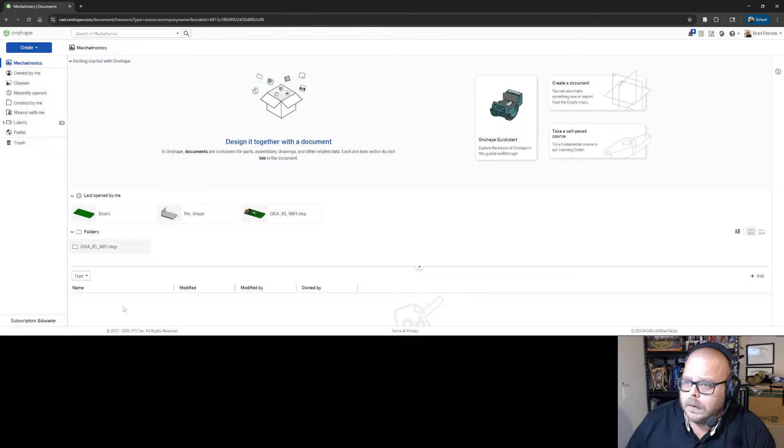So the place I would start — well, first I need to create a document for this thing, and we're going to call it Stinger 1.5. And 1.5 is on purpose, because obviously this guy is the Stinger. And Stinger 1.5, because electrically, this PCB on the new design is designed to be electrically identical to all of the wiring and the hookups that the original team designed into the first Stinger.

So that's why 1.5. Now I do have in my head, for the future, students may or may not know this yet, if any of them happen to tune in — I see one tuned into the stream — but they may or may not know that version 2 is forthcoming as a project for them to work on. So more details about that in the future. But version 1.5 for now, again, the goal is a couple of things.

The goal is to basically make it more tanky so that it could survive visitors to those outreach events. Also more flashy. One thing I have found is when I bring both the Ozobots and the Stinger, the students that visit tend to be more interested in the Ozobots, and I think part of that is because the Ozobots literally have flashing LEDs on them. That's about all I can figure, because frankly the ones we built are so much cooler than those are. So the idea is going to be to take something like this and add some pizzazz, some flair. Again, it's electrically the same.

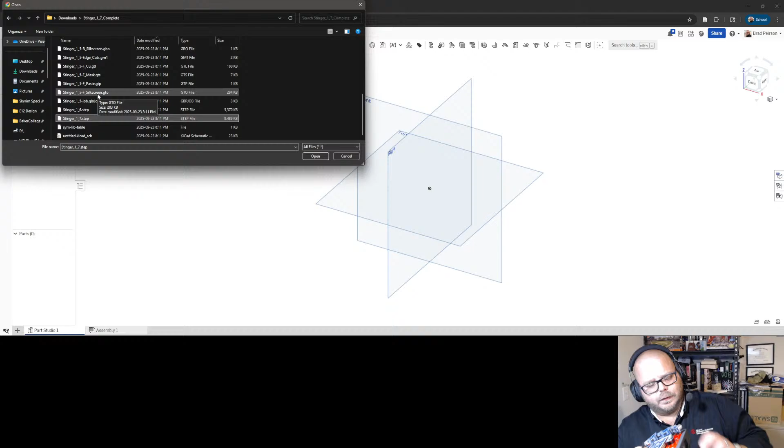This one that I actually have in my hand, I did - this was version 1.6, which is actually the second version of the PCB. It's now on version 1.7 because each time I make electrical mistakes, and I'm willing to admit that. This is the motor driver board on the side. I completely forgot that I was looking at the schematic of the board upside down, so the pins on the custom PCB were backwards, which wasn't good for anybody. The second one fixed that. The current one - which I don't have a current one - electrically is fine.

I was actually testing it in the lab this afternoon. It's electrically sound this time, but then I forgot to check the box for a red PCB. Because part of these projects, especially when they're destined to bring visibility, part of the goal in a design is some bling. And since Baker's colors are red, red PCBs are a good thing, and I forgot. So version 1.7 will have to be redone, and I'll just have to check the box this time for red.

So one thing, I'll be honest, when it comes to the import, we get these options, and by default it popped up without this 'create a composite part' checked. I'm not entirely sure when this is necessary and when it is not. Occasionally, on some of the models I was playing around with between the older first look video and today, when you check this, sometimes it comes in where all the parts come in as a part.

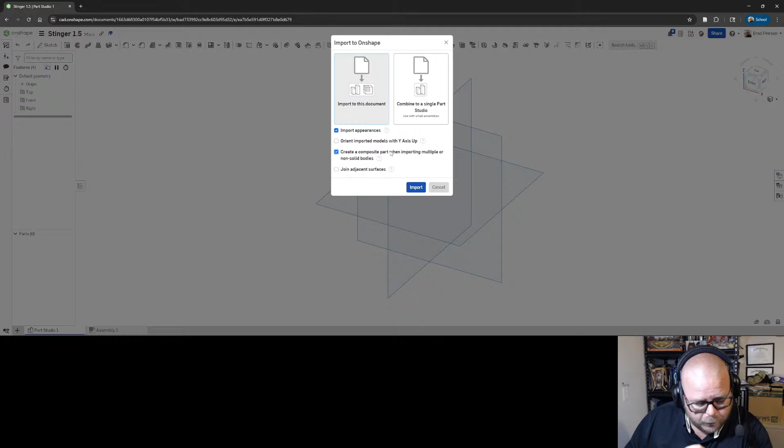Like this thing is going to come in with all of the female headers and the switch, the power switch - all the components that are on the board are going to come in here. And sometimes, depending on how the model was originally set up, if you click this it'll come in as just one part. Otherwise, I believe when I import this, I'm going to get an assembly.

So let's see, we'll import it. It takes a minute for it to think about it. You can always check the notifications - the various things I was playing with before today. The notifications up here toward the right give us an idea of what's happening. So it's going to take a minute to upload, and unfortunately we have to wait.

And I'm starting here, like I said, you got to start somewhere. Since the basis of this whole redesign is sort of that PCB, we're designing around that. That's the logical place in my mind to start.

So we'll give that. All right, we should be done. So now I've got some tabs. Assembly 1, I don't even know what that is. We haven't created that yet, but I'm going to drag it over here because we might as well use that

as our main assembly. Now we have parts. So when I click on the Stinger 1.7 parts, these are all the components it wants to throw in, but they're all kind of mashed on top of each other. The actual assembly comes in and looks correct.

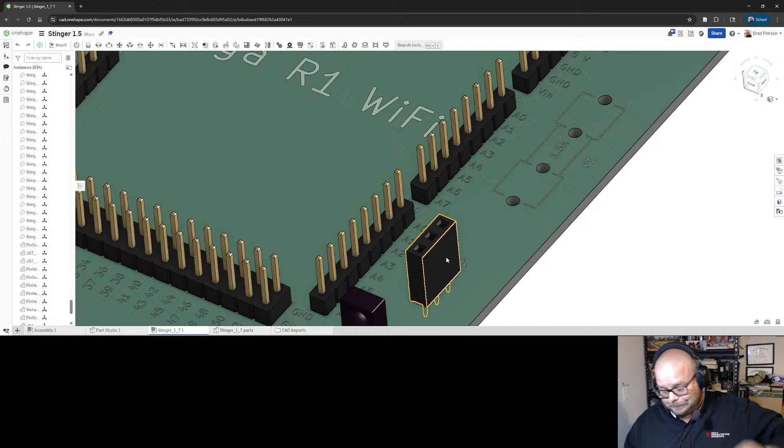Now, I cheated. Like, for instance, this is a power switch. This is very obviously not a power switch model. It's just a pin socket. But I cheated and used it because it had the same pin spacing as the power switch I actually did use on the PCB. So the components here, I think other than that, well, these should have been female. Other than that, I think everything is correct.

But it's not so much the components on this that are important, so much as the sort of the layout of the PCB itself. So that's okay.

There is one thing I want to do, and this is a thing that I noticed about Onshape. So in SolidWorks, I'm going to bring this assembly into the main assembly of this robot. SolidWorks, when you do that, sort of assumes that any assembly you bring in can't move, right? I'm going to move the assembly as a whole piece. Onshape doesn't really do that.

Let's see if I can show it in here without another part to mate it to. So let's bring in, I'm up here and just going to click Insert and Assemblies. Bring in that assembly. All right, and I'm just going to drop it in space and just see if I can sort of show what I've noticed.

So I want to take this circle. I want to, for now, mate it to the origin. Is it going to let me do that? No, it does not. Well, oh no, it lost the circle. That's right. Workflow. There we go.

Workflow in Onshape is different than in SolidWorks. So in SolidWorks, you can click both parts and then hit mate. Here, you have to hit mate and then click both parts.

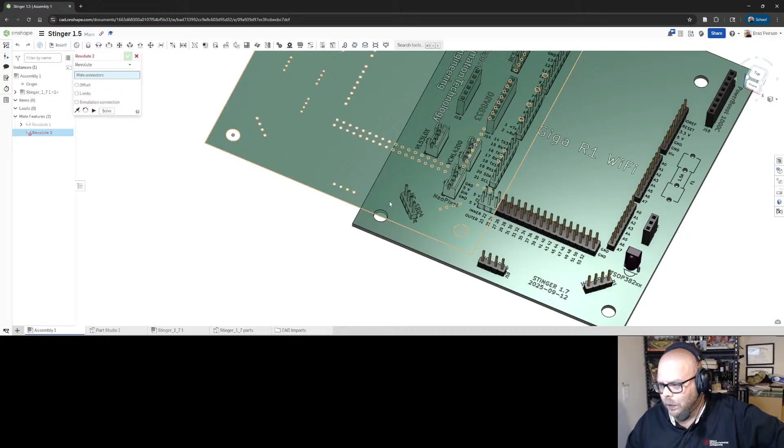But so if I accept that, it took the solder mask, the green on the bottom, and moved it alone without moving the rest of the pieces, which is bad because, I'm lazy. I'm a lazy mechanical designer. I don't want to move all this by hand.

So I'm going to get out of here. I'm going to go ahead and delete that guy. What I noticed to fix that is I am going to select the bottom. It doesn't really matter which part. And in fact, I don't think I want to select the bottom.

So we have a bunch of surfaces here in our model tree. And I'm actually just going to click that first part, the PCB. So that should just be the gray. Click off. The gray here should be what's selected when I selected this. And I'm going to fix that.

I don't really care in this assembly where the origin is because I'm really only ever going to use this as a sub-assembly. So, but once it's fixed, I'm then going to select everybody. And this has got a lot of surfaces because I told KiCad to export all the writing. And every piece of silkscreen gets its own surface.

I'm going to come all the way down, shift, select it all. There's a little group icon here. So when I click that, it all pops into the group, create the group, and now if I drop it into this assembly, insert assemblies. Where are we?

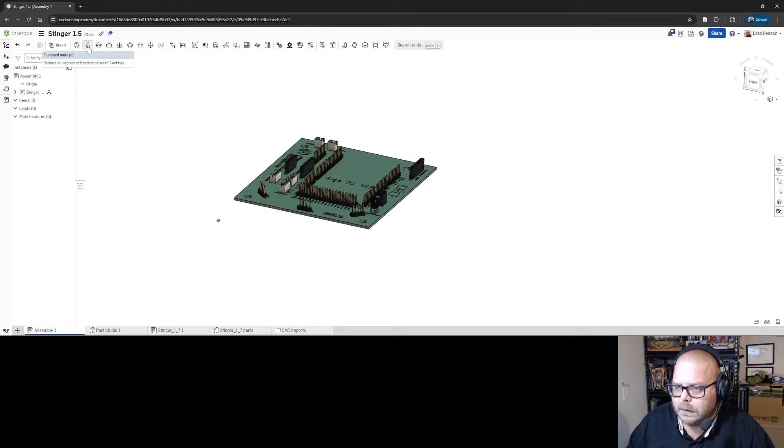Right there. Now, if I accept and mate that guy, and let's switch to fastened this time, because that should also stop the rotation.

Now, because they were grouped, that's what causes Onshape to sort of treat this as one piece. So I'm going to leave, yeah, that's okay. I can leave that there for now. I'm going to leave that there for now.

And I'm going to hop into this part studio. And I'm going to rename it. I guess we could just call it chassis? Question mark. Let's call it chassis. And we're just going to start modeling the chassis.

Now, what is handy is I probably shouldn't have jumped the gun and closed KiCad so quick. So let's reopen that.

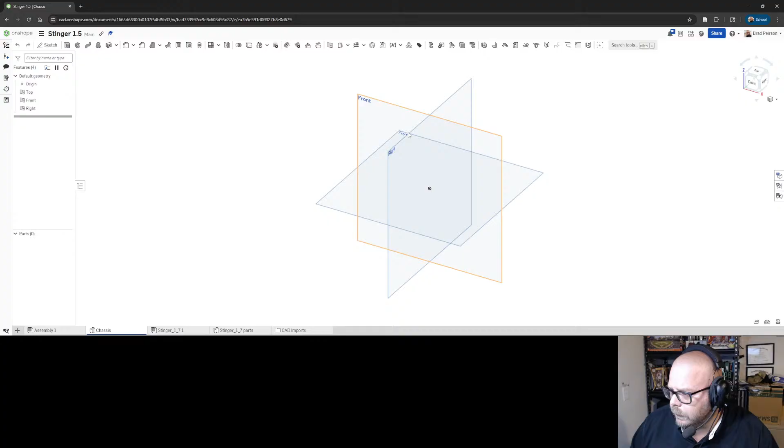I guess I'll go ahead and do that. Now, since I'm basing it around this PCB, what I would normally do is select the top and switch my view to the top, then create a sketch that's going to serve as the basis of everything that goes into this part later. So it's basically going to be a sketch that is the outline of that PCB.

So the PCB is a rectangle, so we grab a rectangle, and off the top of my head I have no idea what the dimensions were, so we're going to go back here. I can get them either way, out of this, and I suppose since I promised an Onshape video, I should get them out of Onshape. So I'll do the same thing.

I'm going to go to my assembly and just select these surfaces, and I get a measurement down here in the bottom right, so it's 4.1 wide. Oops, I can see my SolidWorks workflow, I keep wanting to Alt-Tab. 4.1 wide, 4.1.

You'll catch a lot of that. I've been using SolidWorks now, I was looking back, and the first version, at least that I remember using, was 2005. So that's a cool 20 years of being almost exclusively in SolidWorks.

4.9. And so there's a lot of workflow habits - Onshape is very, very similar. You can figure out most of the stuff that's going on if you're used to any other 3D CAD. But it's the workflow things, the habits that...

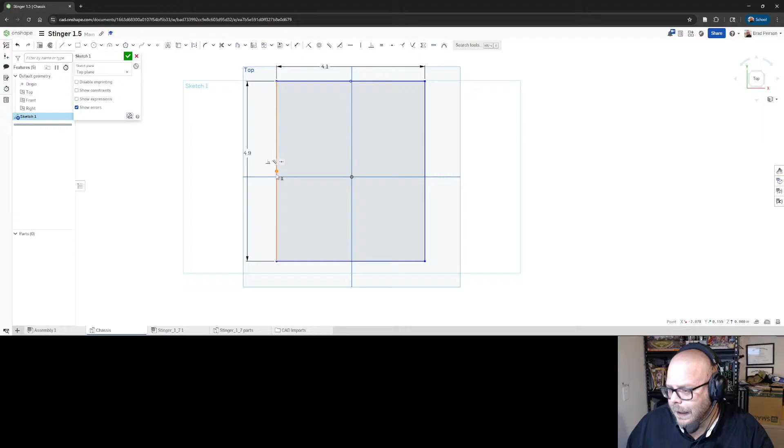Now, to center this thing, because I want to at least start out centered on these two planes, that opens up options for symmetry later. And I'm already thinking ahead to when the motors come into play, because there's a motor on the left and right sides, and I really don't want to model from scratch motor mounts on each side. So if I center it on these planes, that opens up options where I can just mirror features from one side to the other.

So I'm going to select that point and a plane and do coincident, which is U, and... coincident, which is U. Now we're centered.

Now, just for grins - yeah, why not? Because normally, if this were just... normally I would create a sketch, and in fact, my normal thought process, because this is the PCB layout, would be to set it to construction. Just in my head later, looking at it - oh, I can't do that by selecting the area? Oh man, so I'll select each individual line. Fine, be that way. I would set it to construction just so that later when I look at this sketch, because all it ever is going to be is a reference, I would just set it to construction so it doesn't confuse me later, frankly. I'm easily confused.

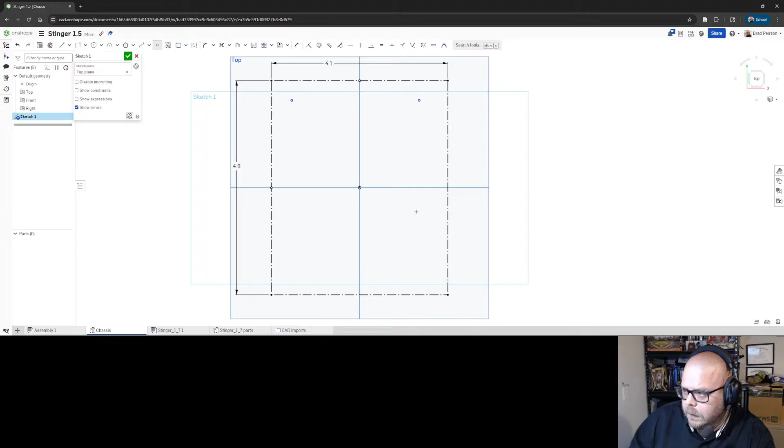So let's see, I want points here, here, and these are going to end up being the locations for the mounting screw holes on my PCB, right? These 4 holes. And like I said, I'll get the actual measurements from Onshape.

So the holes - it doesn't really matter what direction this thing's oriented in, this way or this way. Just make sure, in fact for consistency's sake, let's make sure we're looking at the top. If we look at the top all the time, we'll know what orientation we're in. So ultimately, when this thing mounts, this will be the rear of the robot, the top of this. We're sort of looking at that screenshot in the webcam - there we go, in this orientation.

So all the ports and whatnot for connections, power ports, programming ports, all that good stuff will be back up here on the top. And this will be the top of this view, the rear of the robot.

So for measurements, I believe these should be in line. Selecting, make sure I only selected that. That's the biggest SolidWorks habit to break in my Onshape learning so far: when you have something selected, just hitting escape to deselect it, because it doesn't work here.

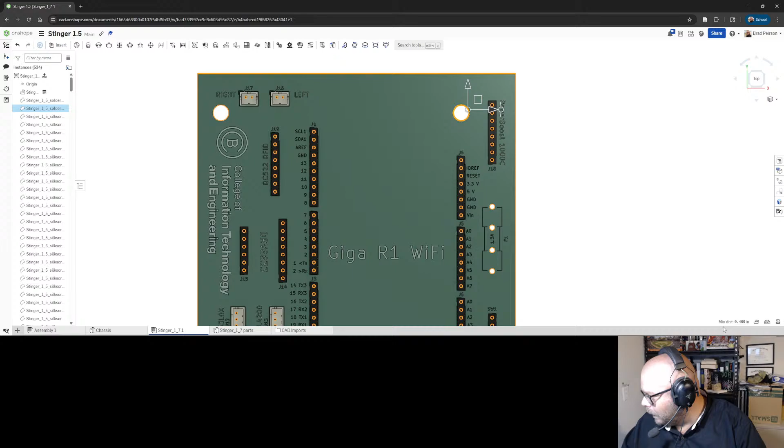You have to click off into space to get it deselected. So select the whole top edge, and minimum distance doesn't work. Notice it lights up that black dotted line. I don't want the edge to edge distance. I want to go in here and get the center distance, which is right at 1/2 inch.

So if I come back to the chassis, right at 1/2 inch. So we'll go here, here, here, 0.5. One feature I do like is it just did it to me, and it took me a minute to decide.

As I was playing around off camera, it took me a minute to decide that I like it. If I select, let's get another dimension.

If I select the point and the line, because it's construction, when I pop over here with my cursor, it automatically wants to treat that as a center line, which gives me a diameter. Good if you know that, bad if you expect that to be the full dimension, because with lots of SolidWorks years getting used to that workflow, it doesn't do that automatically unless you tell it this is a center line.

So these, I believe, are already constrained to be horizontal. Let's double check that they actually are in line, and probably the fastest way is to check center distances again: in Y is green, center distance in green should be 0. It is, so they're in line, so the horizontal constraint works.

They are not equally spaced. Now the bottom ones are equally spaced, the same distance from the long edges. This one is not, I had to move it in to clear the power board.

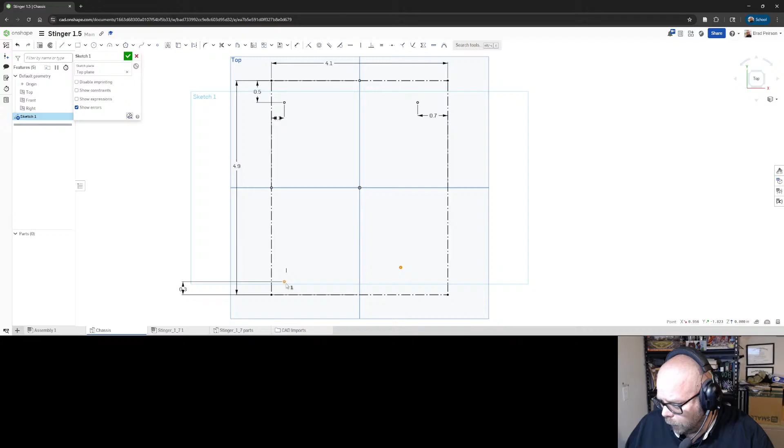And then what is that in, from this edge here to here? Center distance 0.7 in. Cool. 0.7, where are you? Dimension 0.7.

All right, so everybody is locked down. I'm going to accept that sketch. And this sketch is just going to live here forever.

I may hide it for various times, but for the most part, I'm going to leave it visible because this is going to let me reference later sort of where that PCB lives.

So I'm going to create another sketch on the top now to start building out the body of this thing. And what I have in mind, like I said, the original version, which is great - again, you did a great job designing this. The student did,

and I tried to mimic it or build off of it. And I just decided we could get sort of nuts. Again, when we're 3D printing, we're not really held to the rules that everything has to be accessible by an end mill, right? So basically what I'm going to do is start building out a place for the board to sit, and then effectively my thought process is to start, and I'm staring at this thing, trying to become inspired.

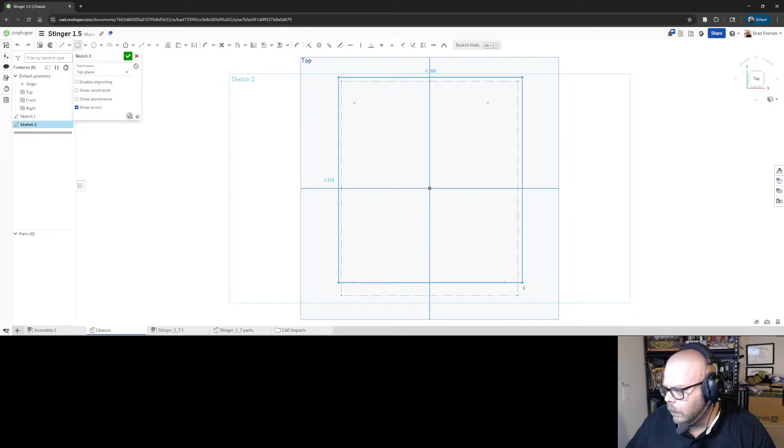Now, I'll be honest, the 3D printers that I have at Baker in the lab, I am not as intimate with as I am my personal printer that I've got sitting over here in the corner. The printer here, I know for a fact, I can hold at least 3/1000 of clearance. I don't know that for a fact on the ones in my lab. I haven't played with them and tested clearances and tolerances yet. So I'm thinking of leaving something big-ish, probably 15/1000 aside. That sounds okay. But that's what this sketch, this construction sketch, exists for.

So I can just do something like this. And actually, I jumped ahead because I don't want to do that yet, the 15 thou. I will. This needs to be big enough to actually hold the board, which is good. See, this means I don't have to undo anything yet. So from here to here, if I want 15 thou...

And I'm going to end up making this a little tray with a little cutout into it. If I want 15 thousandths, I mean, what looks right? A quarter inch maybe. And of course everything gets really huge because that's the first dimension I put in.

Let's try a quarter inch all around first and see how we'd like that. I probably want less than a quarter on the top. 0.25. I probably want less than a quarter of an inch at the top because, again, this thing is oriented this way, and I want these ports on the Arduino accessible.

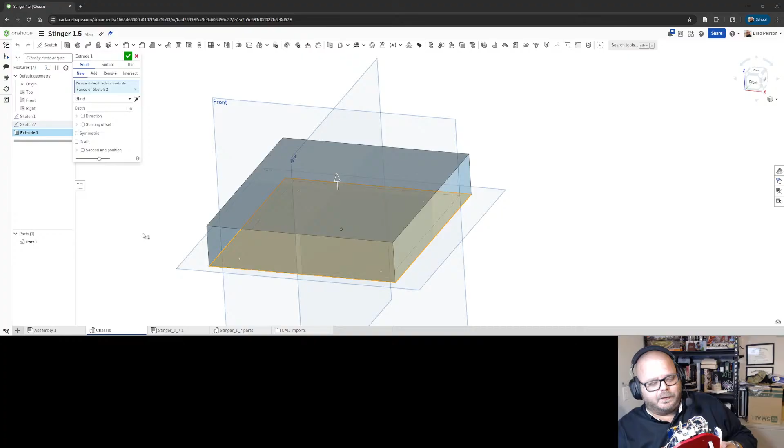Again though, it works, it's great. But the problem is the insane amount of violence these things see once the public gets a hold of them. So a lot of these, like this whole black upper chassis, wiggles. I don't think anything has actually pulled straight out yet, but yes, there will be threaded inserts in every single hole in this particular design.

Like I said, this one does not have them. I don't remember, we played around with some of them on the redesign when he designed this. You can see, there it is, in the motor pocket, threaded holes for those, or threaded inserts rather. That was one of the things I wanted to think through as I'm going through this walkthrough, so I could divert my thought process when I get there.

Let's go here and go to McMaster Carr. And hey, look, I was already looking at it. So the best thing I've found are these heat set inserts. Literally just search for inserts here and it'll pop up.

And these I use a ton, and honestly most of the time I don't even use heat. I'll just grab these, press them in the hole, and for most of the things I've ever done, they've been just fine that way.

These I will use heat for. They're pretty simple. If I click on one of the details, let's just grab one, click in here, related products, soldering installation tips. So these are tips that actually go in a soldering iron. The insert fits on the end, you heat it up and push it in, so the plastic melts around these knurls, and it's insane amounts of hold.

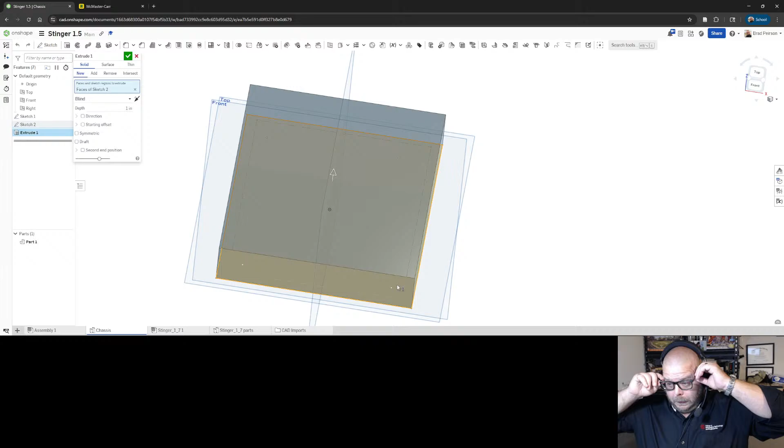And then really what I'm thinking is that's it as far as the whole thing thickness. Then the screw holes, the mounting holes, we really only need thicker material to accept those inserts, and only in the locations where the screws are. So what I'm thinking is make this whole rectangle as thin as possible, and then just add extra material where the screws are going to end up, to get us that extra thickness we're going to need. I think that's the play.

Just personal preference, I tend to think ahead to how these parts are going to go together. I don't like that extruding up, I would rather extrude it down, and that's just the way my head works, because in my head this fits into an assembly, and the PCB is the driving factor. That sits here. This should be the top, right? That's just how my head works.

So thickness, what do we need? First I've got to get the thickness of that PCB, which, like I said, I think is 60 thousandths.

Actually, in this case, this is a terrible time for me to measure off the model, because, alright, so it's 60, that's probably in millimeters, and that's the other reason I keep a calculator handy. My head never converted to millimeters. So 0.063 times 25.4 - 1.6 millimeters is what the solid model is, but the problem is doing it this way.

That's the default in KiCad, and that's not necessarily what I ordered, because the website you order these PCBs off of, you can change the thickness at will. You just enter it on the order form how thick you want it. So probably...

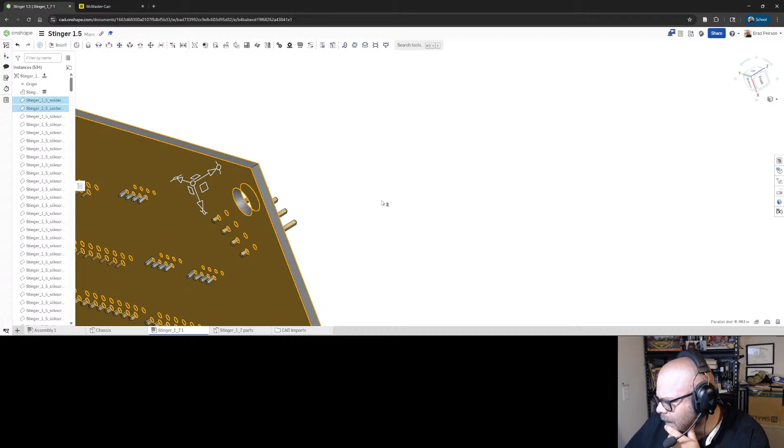Not the best time to measure it, but if we go with 60 thou, it's probably close enough. I don't want to pop the board out of this, partly because that's riveting, streaming, watching me unscrew a PCB. But if I measure that, we'll start with 60 thousandths - it can be adjusted later. So I'm going to make a cutout that's 60 thousandths in.

Well, no, because I can't - I haven't finished extruding that. See, this is how my mind works, back and forth, jumping ahead. So on my paper, handy dandy scratch pad, we've got 60 thousandths for the board is what we need.

If I go back to this assembly, I can get an estimate, because these are the actual components. So if I take a look at how tall these pins are sticking down, let's look at the front. Which ones are the tallest? Kind of a tie. No, these guys are the back. I don't even know - those are the fuse holders? Nope, those are the motor plugs, I think.

But anyway, if I select the bottom of the board and that, it should give me an estimate of the height. So we'll call it 70 thousandths. So we need 70 thousandths.

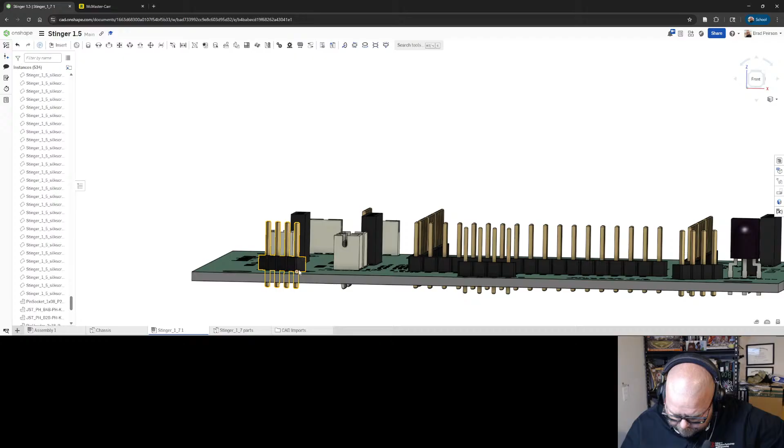Now, on these, because I don't trust it, frankly, that it's accurate - I don't know what the variation is, I don't know the KiCad. I mean, these were automatically generated by KiCad from their library, I don't trust it. So if it's 70 thousandths on this model, I'm probably going to call it 100, just to make sure that after we print this thing, and it takes 2 days to print or whatever it's going to take, that we have the clearance on the first shot, and that's not the thing holding us up.

So we're at 160, 1.6 right now, and I'm thinking, off the top of my head, just at random, I'm thinking 1/8 of an inch bottom. It doesn't need to be ridiculously thick. That would bring us to 285, and add 15 just because I like round numbers. So call it... 285. So call it 0.3.

285. Call it 0.3 and see how that looks. That's a lot better than an inch. It'll at least be a lot thinner. So we've got that.

Now I'll go ahead and create a cutout for the board, and this is sort of where I jumped ahead to like 10 minutes ago. Same surface, I'm going to sketch a rectangle again, and this is where the clearance of the board sort of matters. If I really, really knew the tolerances these printers could hold, I'd make it a lot tighter than this, but I'm honestly thinking 15 thousandths is plenty.

We should be able to hold that. Of all the things I've noticed in Onshape, this is probably the only one that really annoys me, is how much things shrink when you put that first dimension in, or grow, either way. That's probably the only real annoyance I have, honestly. So put 0.015.

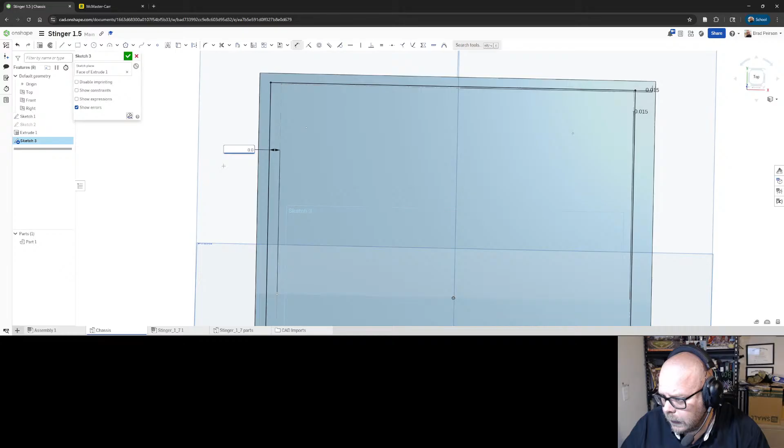And this pocket, the corners anyway, I can leave square because the PCB corners are square. And that's a thing I have screwed up in the past. A lot of the thought process I go through doing this stuff is because I have been burned before.

So if I go 4 inches, remember this dotted line is the outline of the PCB, right? And it does have square corners. I have made the mistake in the past where I'll come in, where's the fillet, sketch fillet right there, and I'll fillet this, and suddenly my PCB doesn't fit because the PCB, or whatever parts going in here, has square corners, and the hole doesn't have square corners anymore. So make sure that when you're doing that, you pay attention to whether the thing actually fitting in the cutout you're making should be filleted or not.

So those will stay square. These outer ones will get a pretty healthy radius when we're done, at least I think - we're not there yet. But for appearances, radiuses will look good. Again, when there's something that has to fit in here that's square, it should probably stay square.

So, accept that sketch. I'm going to extrude, and we're going to remove material. Also not going to be an inch deep. What did I say it needed to be? We need to go 100. But does that really work?

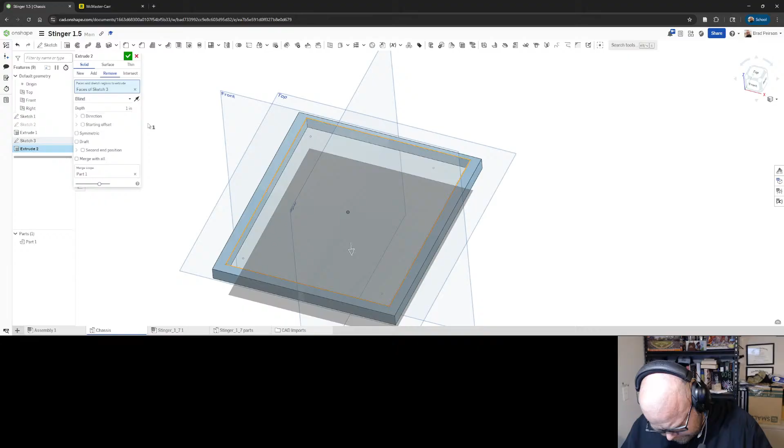So the thought I'm having, if I cut out that 100 thousandths, the problem is - oh no, that shouldn't be that, that should be the 60. I was jumping ahead in my head too. That should be the 60 thousandths for the board, just the board. Where my head was going with the 100 was the clearance for the pins, and I was thinking if I cut the full 100 out, then there's no material where the screws go for the board to sit on, which - my head jumped way ahead, and that would be a bad thing. But it's not actually an issue yet. It would have been if I'd gone through with it.

So now in this assembly, I'm going to go ahead and bring the chassis in at this point. I'm going to insert the chassis because I am far enough along where I have enough features on this to actually lock it in place with respect to the PCB. So I'm going to use a planar mate to lock it to the bottom of the PCB.

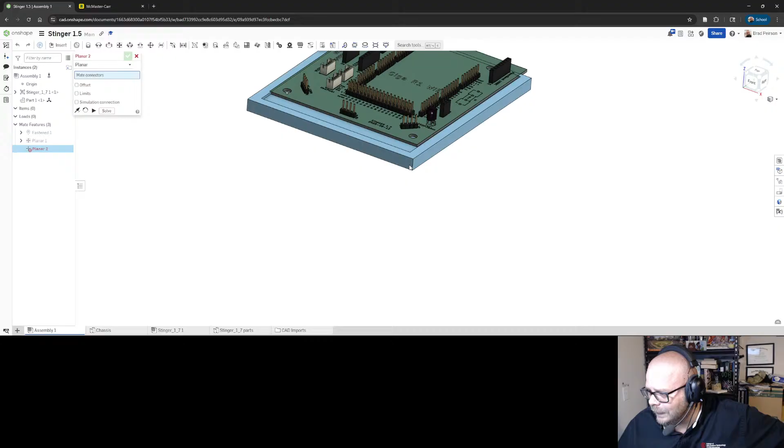And right now these pins will sort of interfere with this. That's fine, that's okay, that's cool, right? They are like sticking into plastic now, which is okay. We'll get there, we'll fix it.

Now I'm going to use width mates. I love width mates - I didn't see them when I was playing around with Onshape the first time, but widths are awesome. Widths allow you to perfectly center assembly objects with respect to another. Just like with SolidWorks, it doesn't really matter what the tab or the width is - they've got to be so the tab has two edges on the same part, and the width has two edges on the same part.

So for the tab, I'm going to select the two edges of the board, and this edge of the board, right? So I've got two tabs. The width, I'm going to select the two sides of my chassis - doesn't look much like a chassis yet, but we'll get there. Notice it's slid over - that board is now centered in that direction. Anyway, we'll accept that. Throw another width at it.

Where are you, width? Got to get my icon straight. Grab the two edges of the board. Two edges of the board.

And then the two edges of the chassis. We should see it pop right into place, I hope. Oh, it helps if you select the width mate. Look at that. So go back and reselect my chassis, and now we should see it magically pop into place, I hope. Did we not?

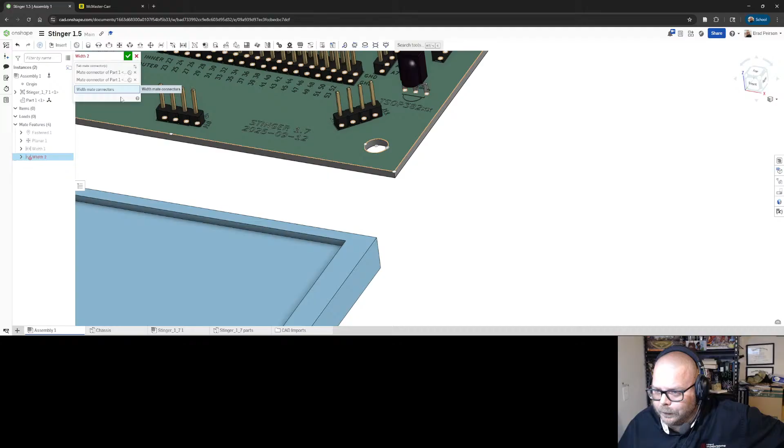Because this is the chassis, this is the board. The width is the board. So I did it backwards from what I did the first time. Oh, the joys of screwing up live, right? So there we go, we accept that.

This guy now, the degrees of freedom symbol. So where's my other? This stinger assembly, if we look. Can I make that bigger? I can. Well, those are all grouped. They don't have degrees of freedom anymore.

Anyway, what I was going to show is when it came in originally here, it had - here's my taskbar - it had a little icon next to it that looked like a set of axes, and that was the degrees of freedom sort of warning, and it's now gone. It's locked down, like you can't drag it anywhere.

So we're good. Now, the reason I put it in at this stage was to make the cutouts for the various things that will have tabs or pins or whatever. Honestly, again, not an electrical engineer. Whatever the underside of those connectors is called, I would call them probably pins. But we can make the cutouts now.

And the reason I did it this way is I'm going to right click on this guy and edit it in context. Now, just because I'm editing in context does not mean I'm going to add dimension in context. So in context dimensions would be if I took - well, first of all, I need to select that surface, right? The surface we're sitting on. I'm going to start a sketch.

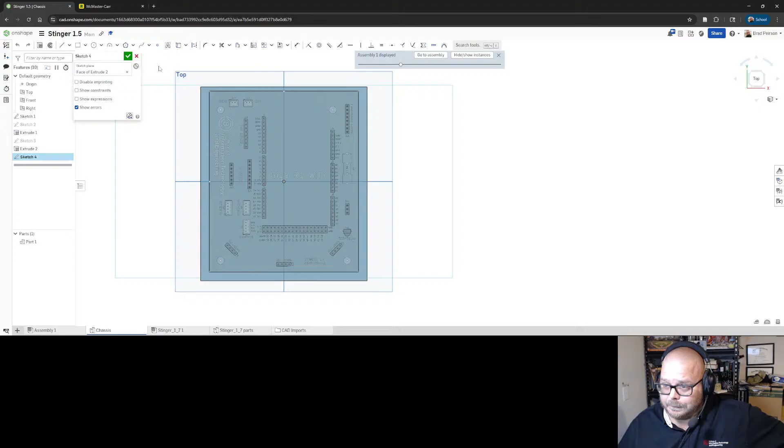An in context dimension would be if I dropped something in here and dimensioned it to something on the PCB, like say this connector. If I do that, new assembly context created. I do not want to do that. Pardon me, still getting over a cough. I don't want to do that. In fact, now I got to go back and re-edit in context. I don't want to do that.

I've never been a huge fan of that sort of style or technique or whatever we call it. Never been a huge fan of it because things get sort of - I don't know if messy is the right word - it gets kind of hard to keep track of changes, I guess is the best way. That's the thing that has burned me in the past, let's put it that way.

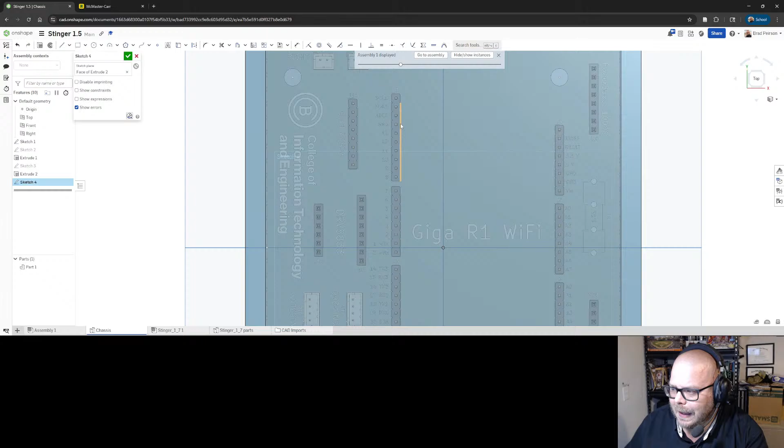Because if I dimension - let's say I want a hole here and I want that hole off of this pin, and I dimension it that way. If I move this pin, like if I shift this whole Arduino over this way, my hole is also going to move. Maybe I didn't want that to happen, but the bigger problem is if I didn't want it to happen, it happened, and I didn't know it because I forgot that I put the in context dimension in there. So those in context references can cascade through an entire design. And the problem is you won't actually know what changed.

And I've actually seen it happen with professional machine builders because it's fast, right? I could dimension off of these pins. I could drop holes in here, tell them to put the holes off of this PCB. That's great. I've seen guys do that with entire machine designs, like industrial assembly equipment, and build the whole thing with those references like that. And then they'll change a tooling plate that sits on top, and all the other holes will change, except they forgot about that, and they didn't get new parts machined, and now nothing fits. So I get a little leery.

About actual in-context dimensions, but in-context editing is kind of awesome because now I can just sort of grab rectangles. And do I want it to be a rectangle or do I want it to be cooler than that? Because we can do pretty funky shapes in here.

Command decision: we're going to go cooler than that, and make it a complex shape. I'm not going to use splines, I think I'm just going to use lines and then fillet them later. So, yeah, I'm just going to start.

These are good. So the sketch I'm drawing is what's going to end up getting cut out. That's a thing to bear in mind — we want to make sure we leave material around the screws, and importantly close to the pins because things are going to plug into these. We want plastic underneath there to support, so we're not just pushing on the board.

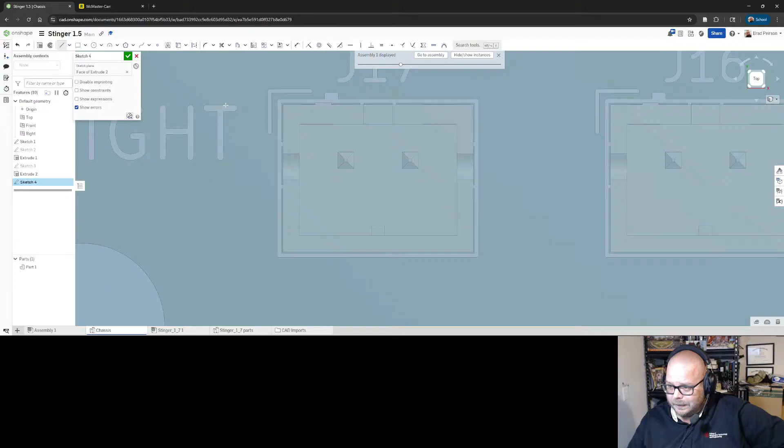I mean, let's do it, I guess. So knowing that I have to be shy of those pins, I also need to be careful because once I start sketching, it will want to try to snap lines to the printing and stuff on this PCB. So I'm going to be careful of that, but I'm just going to start drawing lines of the stuff I want to cut away.

I got to cut away here — well, let's go here instead. I got to cut away here. Now I got to think about this because it's sort of a reverse way of thinking. I'm not thinking about what I want to leave behind, I'm thinking about what I want to cut.

So I wonder — maybe the original way I did it, where I just outline everything. I can outline everything and make it construction and then sort of connect the dots. And that might be the way to go. There's going to be a lot of outlining.

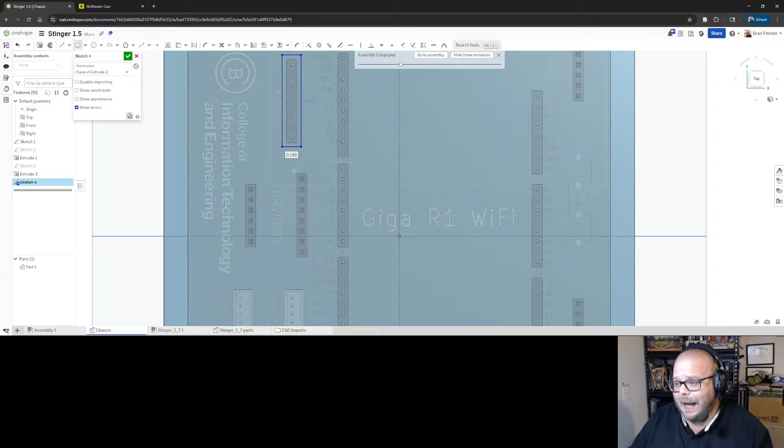Now, one thing I do want to be careful of — another thing I absolutely hate, and I hate it in SolidWorks too, not just Onshape — is when it adds automatic constraints. Like if I click here to draw this rectangle, it's going to want to lock this edge of the rectangle vertically to this point, and I hate those types of constraints. Because eventually, as you're dimensioning, like if I box in every one of these connectors, I'm going to have like 30 rectangles on this thing, and when I start dimensioning them, eventually I'll add a dimension that breaks the whole sketch, and I won't know why.

And inevitably, it'll be one of those automatic constraints. So I hate them. I haven't dug deep enough yet to see if there's a way to turn them off — I know in SolidWorks there is, it's buried in the preferences somewhere. But...

I honestly think that's just what I'm going to do — outline everything I want to cut away, set it all to construction, and then sort of connect the dots, either with a spline, maybe. I don't know, maybe I won't connect the dots. It's fluid, you know — like I said, at this point it's literally more art than science. We've got some sciency engineering concerns to take into account, like things need to be a certain size, right?

But beyond that — oops, see, automatic is straight, and right now parallel is fine. Where did it throw it? Coincident's fine, because that's going to be the corner. Which one did it make? Right there — see how it lights up that bottom rectangle. I don't want that.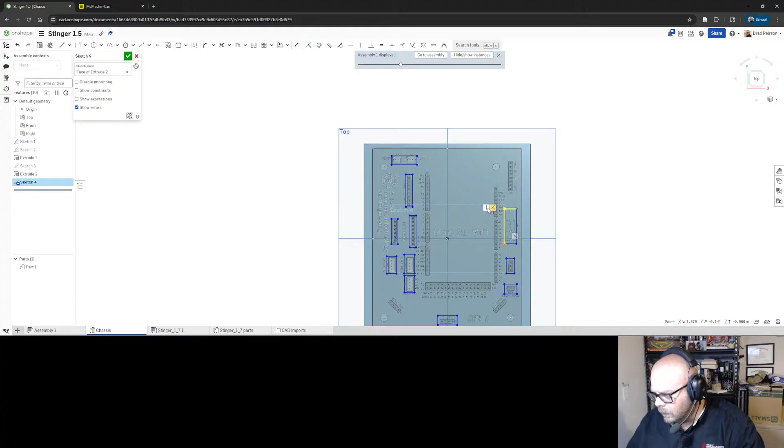Oop, go away. Where are you? That one — you want to get rid of that one. I want this to be vertical. I do not want it to be vertical locked down to this rectangle at all.

So we'll go here, we'll keep doing it, making sure we avoid those automatic constraints. And again, I'm being very careful not to sort of grab — occasionally it wants to snap to things on the PCB, and I do not want to do that. It's a thing I very much do not want to do.

So, actually, for this side there's so little space. The spacing on those pins is 100 thousandths, 0.1 inches, 2.54 millimeters. So from this pin to this pin, center to center, is only 0.2 inches. There's not going to be a lot of plastic we could fit in there anyway. So for these vertical runs on the Arduino, I'm just going to rectangle the whole thing and not bother splitting it up.

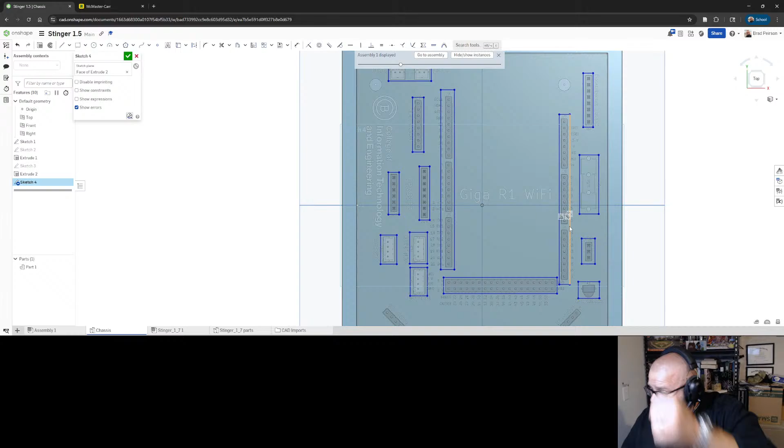Because there's not a ton of plastic that's going to fit in there anyway. Now,

Most of these things, like this guy, even though this is a female socket where it should be a switch—well, before we do any of that, I missed two. I missed the angled one, can't use a rectangle for that, we got to use an aligned rectangle. We're going to do this and get it close.

Just close, I'll clean it up in a minute. Now, most of these things, like these headers, female and male both, have the same size pins, which theoretically should mean they need the same size clearance. So I'm going to take the skinny edge of all of these and set them equal. That means I only have to dimension that once, I hope.

And I hit control—there's a SolidWorks workflow thing. You don't need to hold control in Onshape, buddy.

So I'm going to grab the skinny edge of everything that goes around one of those headers, including the switch, because it has the same spacing. That skinny edge, that skinny edge, that skinny edge—not this skinny edge because it's double. Is that all of them? That looks like all of them. And I'm going to just set those equal.

And everything got huge, probably because of whatever I picked first. I can shrink it, and at this point I'm just going to start guessing at what looks good.

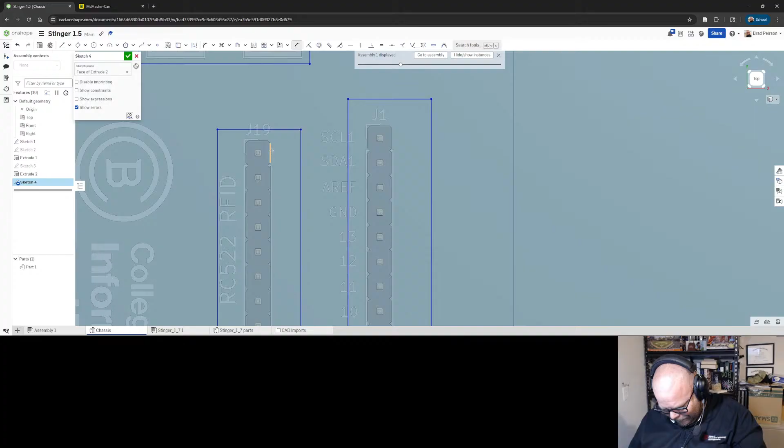Now, if I look at the PCB, the solder pads on this thing—the solder blob is not very big because the solder pads are not very big. The solder blob is only ever going to be, I mean, it might be a little bigger than the diameter of the pad, but honestly not by much. And realistically, all the more clearance I need is the size of this white outline on either side. That's really all the more width I need.

Let's switch back to the full screen. If I get real close and hopefully focus—anyway, you see sort of an open one over here that I didn't solder yet. And those pads are well within the outline on the board, which means—and the outline is actually on the outside of the black plastic that mounts those pins. So as long as my cutouts for clearance clear that white outline, we have plenty of space.

So we don't need a ton of width here. So what is it now? That's 0.3. I don't know, a quarter. Oh sure, and then everything moves. I love you, Onshape—everybody moved.

Let's go back—why does that look like it actually got bigger? Did it get bigger? We can actually go smaller. Like I said, my brain never switched to metric.

I'm still very much an imperial measurement guy. 1875 looks kind of funny to folks that aren't used to imperial measurements, but 1875 is a pretty standard imperial measurement. What do we get if we go to an eighth? 125? Does everything fly so far every time I change a dimension?

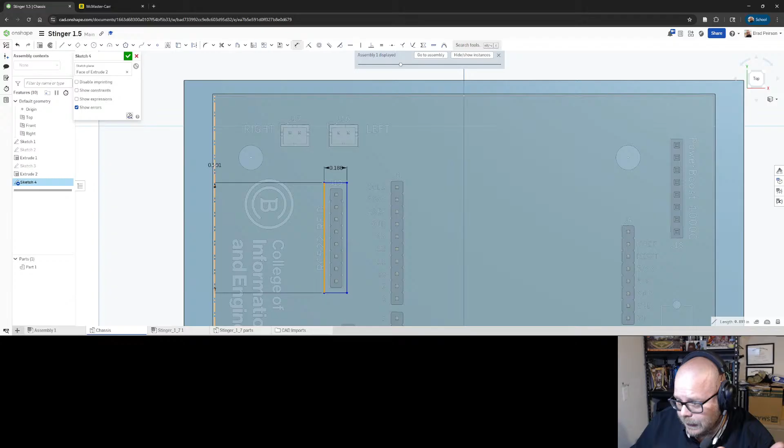So here again, grabbing, remember I've got my board layout sketch still showing. That's the gray line you can kind of see that lights up orange, the dotted line. So when I grab that, I'm not dimensioning the PCB, or to the PCB assembly model. That's important to remember. It doesn't really matter whether I do it to the dotted line or to the actual plastic. I'm inclined to do it to the actual plastic, because technically speaking, the dotted line doesn't exist. That was the whole point of the dotted line.

And then from here, I'm just going to try to center it to this, again without the quick and dirty way. I will show it because it's a thing, it's allowed, people do it all the time. The quick and dirty way to get this cut out perfectly centered with this would be to grab a line, drop it on the center of this rectangle, and will it actually let me? Yes, grab here and hit center, midpoint.

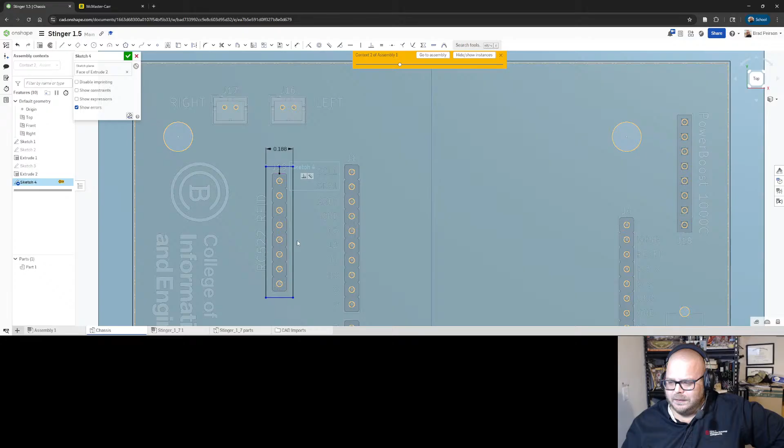Okay, it created a context. If I click this down, make it vertical, oh look, it's centered, right? That's quick, that's easy. And actually, you know what, I'm not doing this for production. I'm not gonna sell this thing and make billions of these things, so why can't I do it that way? I don't see a reason I can't do it that way. Is there a reason I can't do it that way? I don't think there's a reason I can't do it that way. So guess what, I'm going to do it that way.

Ordinarily, that is not my normal workflow. I avoid the in-context stuff kind of religiously. But yeah, I'm going to leave it that way. I am going to make this, well, everything's going to end up construction, so I might as well leave it for now. Everything I do will be construction in a minute.

So let's center this guy here. And it doesn't like to snap on accident. It doesn't, I'm trying. It doesn't like to snap to the PCB on accident, but it will this way. And so there is no line here in the center, but this should be the center. If I hit not midpoint, but if I coincident that guy and make it horizontal.

Okay, we're still not locked down now, but we are centered. We're still not locked down because I haven't set the height. I guess. Since I'm doing all the in-context stuff anyway, what's that distance? 80 thousandths? So why don't I just do it that way? Why don't I just, if I'm going to, why don't we go all in on the in-context stuff?

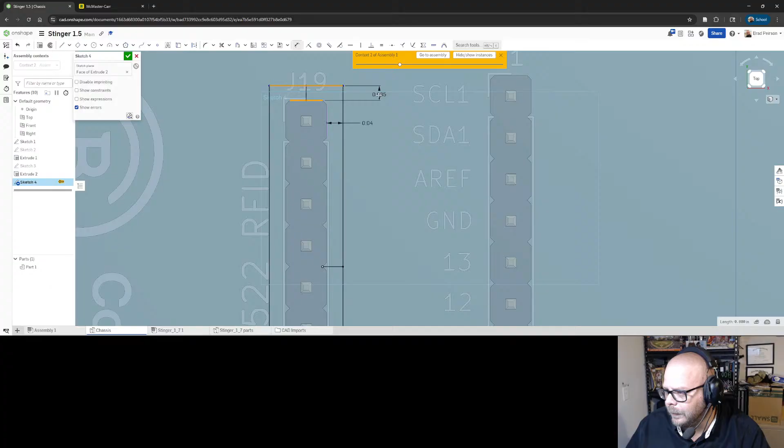80 thousandths, whoops. Yes, I'm aware that it requires me to hit... All right, where did the 80 come from? Was I making things up? I'll go 40. 40 looks good to me. Do it on the top too, and that way I only have to dimension the two. The bottom one locks in place because I've already got it centered. I kind of like that.

So yeah, let's do it. Now, we'll get there. I was going to say, what would be the middle of this mess going on here? Because one thing I will warn you, should you use the Arduino Giga R1 board, which again, I'm not an electrical engineer, I'm not an expert on Arduino. It's my understanding that this footprint for these connectors is the same footprint as their Mega board.

And one of the reasons this PCB is version 1.6 is that version 1.5 assumed all of these gaps where Arduino doesn't have a pin are equally spaced, and it turns out they are not. Notice that this gap is a lot closer than this one. And it took me longer than I would like to admit trying to plug this in.

So won't those midpoints on the sketches interfere with making cuts?

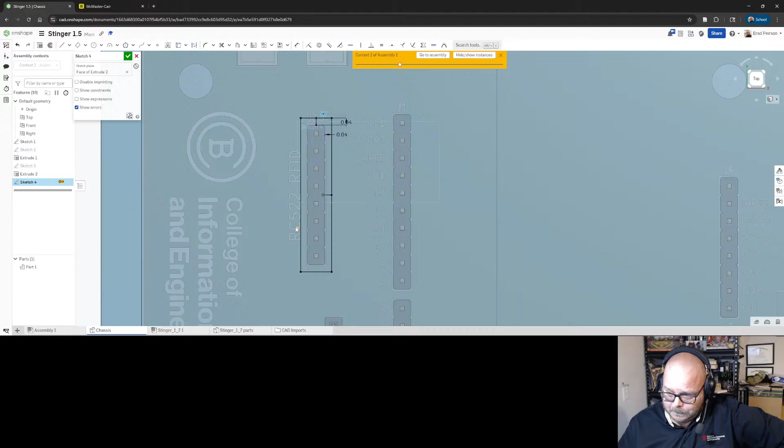Yes, but again, this may not work. Don't get me wrong, what I have in my head may not work. My plan is to outline everybody in a similar way and then make everything construction. Like literally everything, everything I'm doing now, just highlight it all in construction.

And then I'm thinking of connecting the dots. So I know I want the cut out here, but then I want material down to here. That's where I'm thinking of going.

Let's get rid of that line before I forget it's there. That's where I'm thinking of going, and that's why I agree with you.

Yes, very much so, it would interfere with the cuts. But if this plan works, and I'm not saying it will, it ultimately won't matter. So anyway, that's the idea I'm shooting for.

And like I said, I wouldn't normally do this, but I don't want angled, I want corners again, so let's drop one here. And again, I might as well continue the in-context theme.

So let's give it a dimension. I'd like to go off the plastic, I think, rather than the print. I'm going a little nuts on this particular one, but not too nuts. Some things have to be sound.

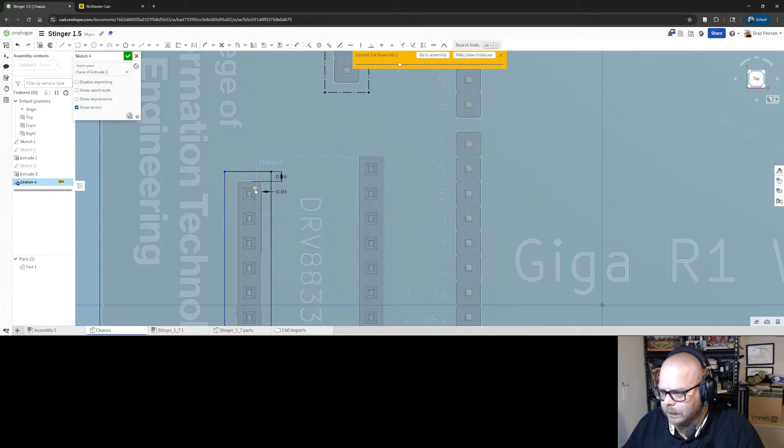And then we can center it, and those two dimensions should define everybody if everybody's centered. Grab you, you won't snap there on your own. That might be, like I said, I don't use these midpoints, I don't use the in-context stuff enough to call it an annoyance.

Because how can it be annoying if it's a thing you never do? But it may be to some people that do it a lot, who are used to SolidWorks just sort of doing it for you. Me, I sort of hate it when SolidWorks automatically snaps to the in-context part, because I didn't want it to, most of the time.

But we're getting a little nuts here, getting a little nuts with this design, right? So I'm just going to keep rolling through and doing the same thing to just about every one of these. 0, 40 thousandths, 40 thousandths.

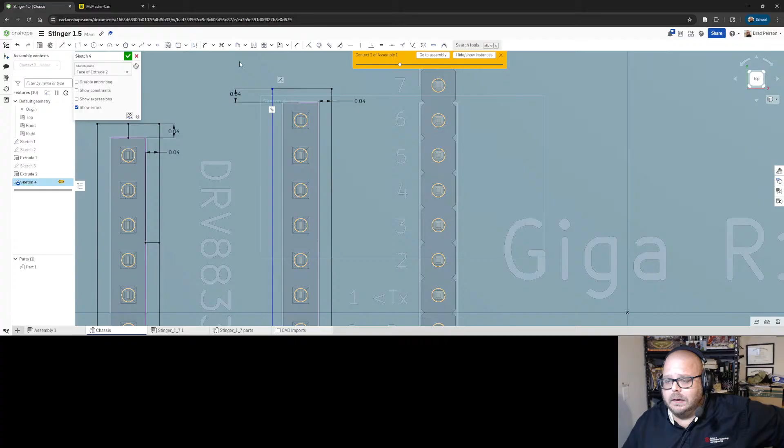And that should be more than enough clearance. The plastic is already way bigger than the pins. Looking at the physical board here in my hand, the plastic is way bigger than any solder blob is going to be. And then 40 thousandths per side, so 80 total, that should be plenty to make sure we don't hit anybody.

So here and here, and then midpoint that guy, and vertical that guy.

I'm still, you see my cursor bouncing all around this because I'm still trying to get used to where all the icons are. Hey, I don't want to risk it. It looked like it wanted to jump to the midpoint. I don't know if that's printing or if that's plastic, so I'm not going to risk it. Let's not get too insane. Actually, I already did the vertical one, so I guess that whole insanity is my fault.

Where's the center? Right, there's the center. Select the line and center and horizontal.

And this is the fun part. However, doing it this way, now these guys, those I really wish, whoa, that guy's plugged in and turned on. That's not good. These guys, I really, really, really wish I had unscrewed this board or had brought one of the other ones.

So I do believe those pins are in a weird spot. No, according to the physical board, they're still well within the screen print outline. So as long as our cutout is outside that outline, we're going to be clear all day.

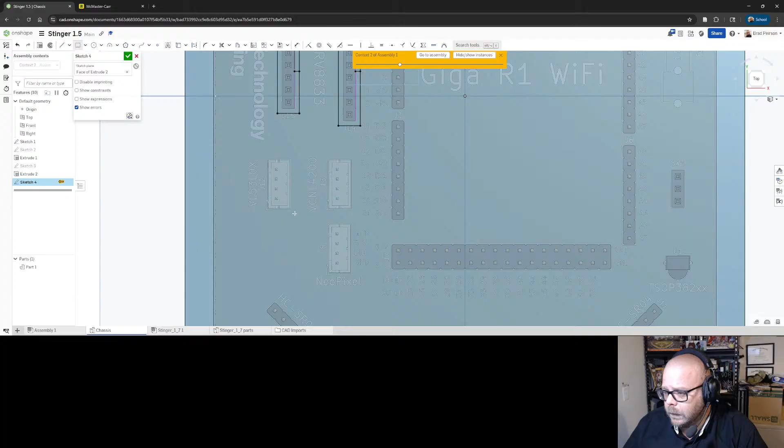So I can do the same exact thing with all of these guys. Boom, and boom, and boom. And I think I'm going to stick with the 40 thousandths theme.

Again, looking at this, this looks fairly accurate to the physical one I have in my hand. So the screen printing puts the pins toward that side of the screen printing, and that's definitely where the solder pads are, and they are well within. So yeah, let's stick with the same plan.

And again, I'm going to go 40 thou from the plastic, not from the printing, just because I want to. I mean, nobody told me I couldn't.

0.04, and centering is going to be tough because that's not one line, but that is. So why can't I center it to that? Where are you? Grab that center and grab that line instead of the plastic. We can cheat it a little. Why not? Midpoint, vertical.

Now, don't waste your time. Already did the vertical one. Grab the midpoint. Where are you? Midpoint, and here, and that should be one line, is it? Yes, good. Midpoint that guy.

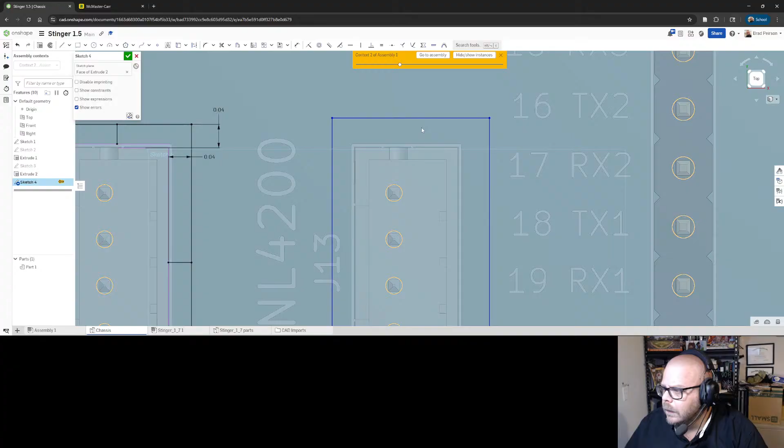And grab that guy, midpoint, vertical, grab it. I'm getting better at remembering what my icons look like. Every once in a while you still see me reach for a midpoint when I want a coincident or something like that, but it's getting better. Twenty years worth of habit is hard to break sometimes.

So, off of plastic. Dimension off of plastic. Always off of plastic. 0.04, 0.04, 0.04. Good, good. Everybody's locked down. Black. I like it.

I don't like unconstrained sketches. If you've seen any of my other SolidWorks videos, I highly recommend it, because those are a slightly different tone in that the idea was more lecture, I guess. But you'll know I hate unconstrained sketches unless you have a really good reason.

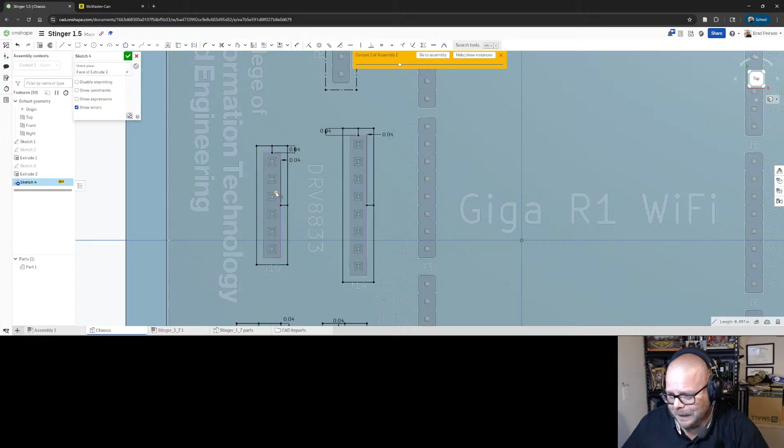Lock your sketches down. You don't need stuff moving around on accident when you don't intend it to. It doesn't take very long, though it is extra work. I could leave all of these, this is guesswork, right? I made up 40 thousandths. I completely made it up. I made up the fact that I wanted to go from the plastic instead of from the screen print. I made it all up. I could literally leave this blue just like it is, and it's going to clear the solder all day, it's going to do its job. I just like my sketches locked down, so I'm going to lock my sketches down. It's just the way I do it.

So here we go. There's no real speedy way to do this kind of thing. It's just repetitive, over and over, but we are getting there.

Grab the center line, and you have to go to that point there, and you're coincident, not a midpoint. Vertical, and grab another line, and center there.

You know what I probably should do, and in fact I'm going to after I finish this one, is rather than do like 30 of these things and then see if my whole connect-the-dot plan will work, I should probably try a couple of them first and see if the plan works. Yeah, why don't I do that? I'm going to finish this one just because it's already started, I don't want to forget where I am.

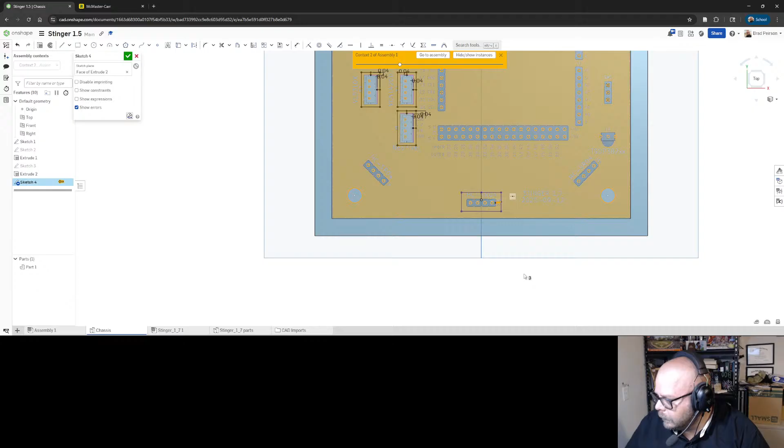Horizontal, and 40 thou clearance everywhere. 0.04, and 0.04.

When making things up on the fly, nothing sounds more official than having a plan. So, that and construction, everybody.

All right, now the question is, what do I want to cut out with? Should we go completely nuts? Grab the spline. Ooh, Beziers. Nah, let's go with the spline. Let's try it. If I grab there and there and just start outlining, the hard part's going to be keeping track of what I want to cut.

Ooh, no, I don't like that. That's going to dip in way too close for comfort to where we wanted clearance. So let's get rid of the spline. I mean, really, you can just use a line and start drawing, I guess.

And we do have the ability, it doesn't have to be one interconnected shape, right? We can do a cut. We could do it a couple of ways, really. We could do one interconnected shape, that's always the option, cut out one time, be done.

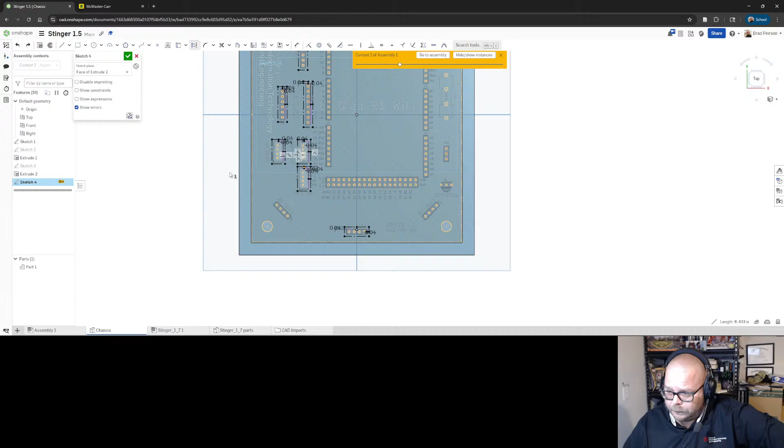I could leave all of these, like you mentioned in the comments, I could make all of these construction lines, the midpoint lines here, make those construction, leave the rectangles intact. In fact, that might be the way to go, just cut out the rectangles. That, at the end of the day, is going to give us the most support, if we just cut out exactly where we need and don't mess around with any fanciness.

I like that, change of plans on the fly. I like that, you're right. I'm going to make all the midpoint lines construction, and I think leave all of those. So, Control Z to do it? Or is that just going to... there we go.

So I do have to go back and make all of those other lines construction, which I will do in just a second. But for now, I'm going to unconstruction these guys. And then grab. Yeah, that'll do it. Rather than... I was going to get too fancy.

Ultimately, frankly, in the back of my head, part of my reason for doing this stream is to go through my thought process as I work through this stuff. I was thinking I was too lazy and didn't want to go through the effort to figure out how to outline one cut. Occasionally in engineering, laziness wins. I was told more than once that the best engineers, some of the best solutions, come from being lazy. We want to make things easier. That's where new ideas come from, trying to make life easier for ourselves. So a long tradition of engineering laziness has led me to this point.

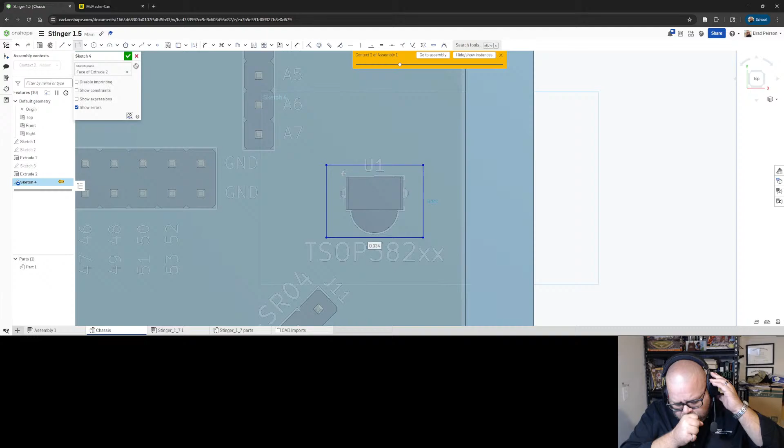We're just going to cut out individual rectangles and call it a day. This one's going to be weird. I have yet to decide.

That is an infrared sensor. On here, and I promise I'm going to go full screen and remember to go back to the CAD, that's the infrared sensor. That allows these things to basically interpret - it's all up to coding, what program you put in it - but it allows them to interpret the signal from a TV remote, just a standard television remote. In fact, the ones I take to the career fairs were just some cheapies I bought at Walmart. And that's what that does.

This is the IR sensor, and according to the board, it is soldered to the board. I did that so that in the schematic in KiCad, it would show that as a component, the infrared sensor, because all of these, like this HC-SR04, these ultrasonic sensors, I did not put into KiCad because it can't treat this as one component, at least not easily. So for all of those, I just used the pin headers, and that's why they came in as pin headers.

For the IR sensor, the infrared sensor, it's one of the only components in this entire robot that is a standalone component. The SR04 ultrasonic sensor is a whole collection of different ICs, and there's a speaker and a microphone, all that good stuff. It was easier to just put the headers in here and call it a day - I don't have to reinvent the schematic for a product I'm just going to buy. I'm buying this, I don't need a schematic for it. But this, since it was one component and I am buying this one component, I decided to do that.

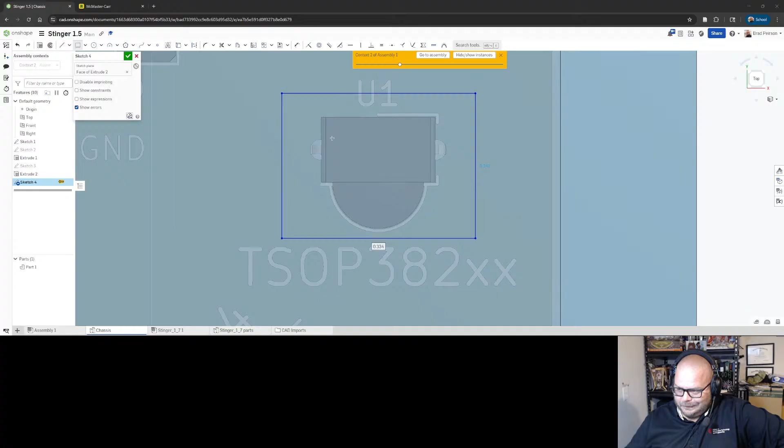In actual practice, though, these holes are still 0.1 inches apart. And I still used a header and just plugged the IR sensor into the header. So all of that to say, that's going to be the tricky part here - realistically, I have no idea where the 40 thousandths clearance should be. So honestly, this one I may just leave blue, leave it unconstrained. That is a thing that I hate, I don't like to do that if I can help it. But I think I'm gonna have to for this one.

But I want to get off rectangle. What I can do is, regardless if I'm putting the actual IR sensor or a header there, I can select these and set them equal. So I at least know that. Length I don't want to set equal because this has only got 3 pins, this guy has got 4, but I could jump ahead to this guy and set up this guy the same way I did the rest of my rectangles, because this has got 3.

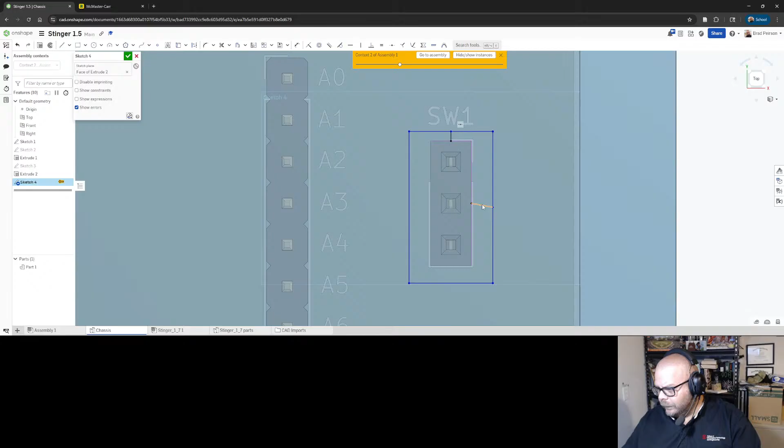Now this one I also cheated on - let's vertical that. I also cheated on this guy because this is a switch that's soldered directly into the board. It is not a header, and I just used a header there because the spacing was right. KiCad's library didn't have a switch that worked for me, so I decided just to grab a part that had the spacing and figure it out later. Fair play, right? 40 thousandths.

So that's sized now, appropriately - even though since I made up the dimensions, all these dimensions are effectively made up, I don't know what appropriate really is. It's sized appropriately for a 3-position pin header, which means if I set this now equal...

So it's now length and width equal to a 3-pin header, and I can see where the holes are. I can sort of guess... I don't need the 40 thousandths anymore, I don't need the length, but I could drop lines in here. I suppose a proper designer would get this in the right spot. Except - oh, there we go, I can see that.

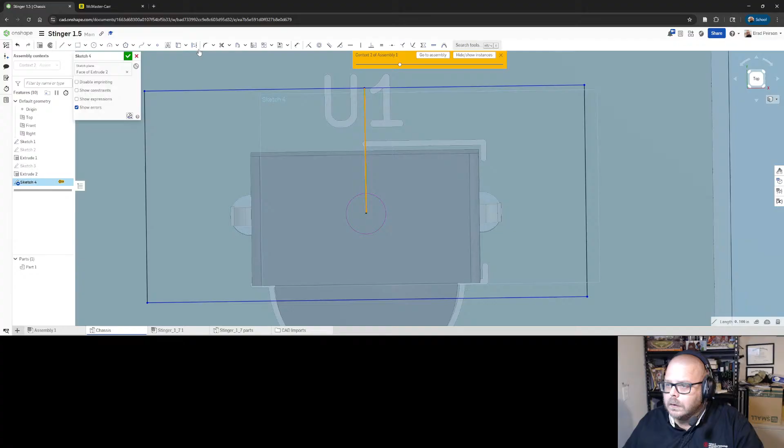Concentric. Yes, so now that's centered in the hole. Now if I make this vertical, it pops my width in, and I do the same thing for one of the side holes, and that'll lock in the vertical position. And here - concentric, where are you? Concentric, and horizontal. Go back to a straight top view so we're not looking funny.

We should be perfectly centered around those 3 holes, which - regardless if in the final product I decide to solder the IR sensor directly to the PCB or put a header there - now it's not going to matter, it's sized for either. Well, it's sized for either anyway, because it's really more dependent on where these holes are than where this plastic is.

So, yeah, awesome, cool. I don't have to leave blue in my sketch after. I hate blue in my sketches. I don't have to do that after all.

So now, the tricky guy - this fuse is a little tricky because the solder pad's hanging out here, and I have no idea how big that solder pad actually is. I have tried, as far as I know - again, not an electrical engineer - I have tried in KiCad to measure the solder pad, and I honestly have no idea how to do that. I can measure the diameter of the hole, but I can't figure out how to get a dimension off the solder pad itself. So I'm going to straight up guess as to where this one should end up.

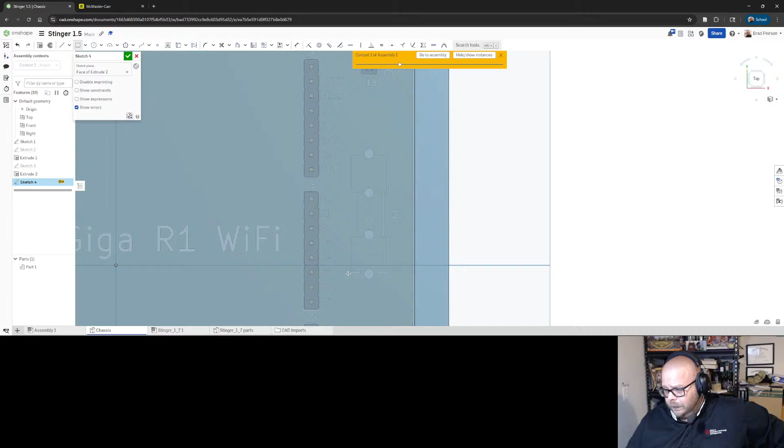And maybe this one I do leave underdefined. So I do know that if I am at the silk screen, that is plenty of clearance. Looking at the actual physical PCB in front of me, that solder pad does not touch this screen printing, the white lines.

So as long as I'm at the white lines, I'm wide enough - definitely wide enough. The height is going to be the thing, and it's just going to be a guess really, because I don't see... I could be a nerd and get a ruler out. That's the other thing I always keep handy, except now I don't see it. I've usually got a machinist scale sitting out here for quick and dirty measurements. When you're reverse engineering something, it's a good idea to be able to take measurements off the thing you're reverse engineering, but we'll just do it that way.

We'll do this, and like I said, in this case I'm going to just make these coincident, because if I'm at that screen printing, I am well clear of these solder pads - like all day long, with plenty of clearance. There's at least as much clearance, probably more, than my 40 thousandths that I put in down here. There's more clearance around these solder pads.

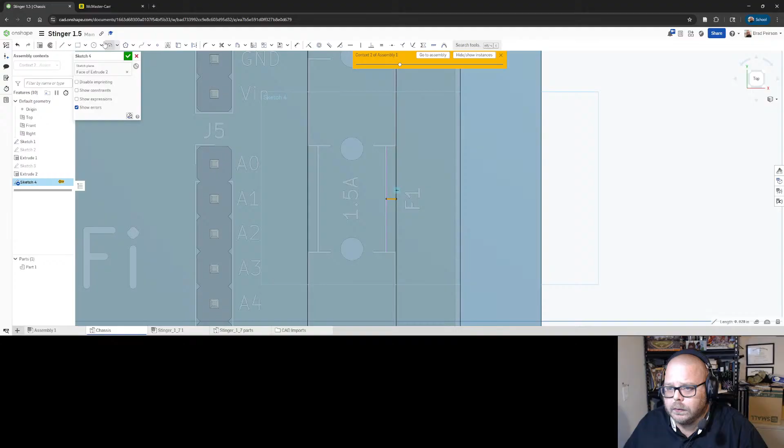Vertically could be an issue. Let's center this thing first vertically. So here, right - midpoint, random line to midpoint, and horizontal. That will at least lock us. Make sure - did I do that for the earlier ones? Nope. Boom, boom, you need to be construction. Don't want to forget that.

Like you said in the comments, that's exactly right. It will screw up when I go to make a cut if I leave some of those not construction.

And I don't like making it a wild guess, so bear with me as I dig through my desk drawer here - there should be a machinist scale. Where is my machinist scale? I don't see my machinist scale, so I'm going to do it super scientific - see if this cheap ruler somebody gave me once has enough resolution on it to see how tall that's going to be.

What are we in, 16ths of an inch? So the top of this solder pad is almost exactly a 16th of an inch above this screen printed line. That's almost perfect.

So 16th off the top of my head, is that the 1875? Tell me it is and I'm just an idiot. The 1875... nope. So that's 0.0625, 62 thousandths, 63 thousandths.

Make it 100? Another 40 thousandths just to make sure we are clear. Sounds good to me, we've been using 40 thousandths everywhere else. So make it 100, make sure we're clear. That probably ought to work. And the great part is, if it doesn't work, we'll always think it should have. Yeah, why not, sounds good to me.

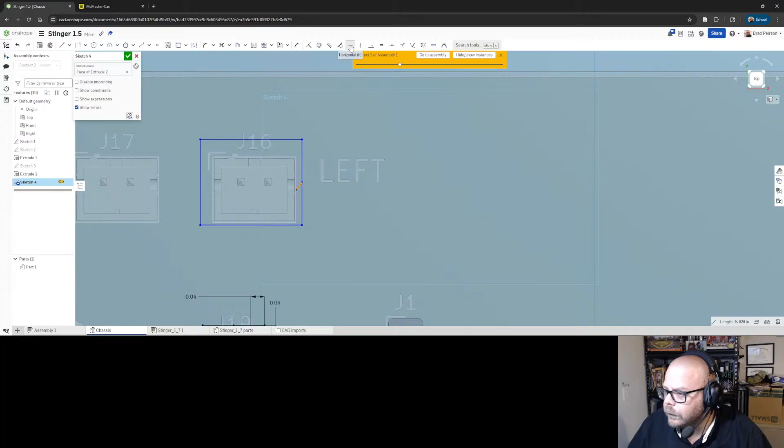So maybe next time I'll have to look into making that happen, or play with the streaming software a little more. And I'm just going through and doing the exact same thing to all of these guys.

Ooh. Yeah, I've heard that, especially if those producers happen to be affiliated with a certain mouse, that's very dangerous waters when it comes to copyright. Maybe not so much now since... I haven't heard if there have been any official legal challenges to the whole public domain thing yet, but I'm sure that's coming. When Winnie the Pooh entered the public domain, it took him 10 minutes to make a horror movie, so I'm shocked nobody's pulled that with the mouse yet.

Again, 40 thousandths. Why? Because that's what we did everywhere. When it's completely made up, you might as well stick with it, right? There's no logical reason I can explain to you why I picked 40 thousandths, it just looked like it would work.

We'll keep going. These are a lot of rectangles, rectangles for days, we've got. I'm going here to this segment because this is centered in this plastic connector, and the screen print on this top side, because of this tab, which I'm not sure why it's there, centering it here would not be a good thing. I want it centered here.

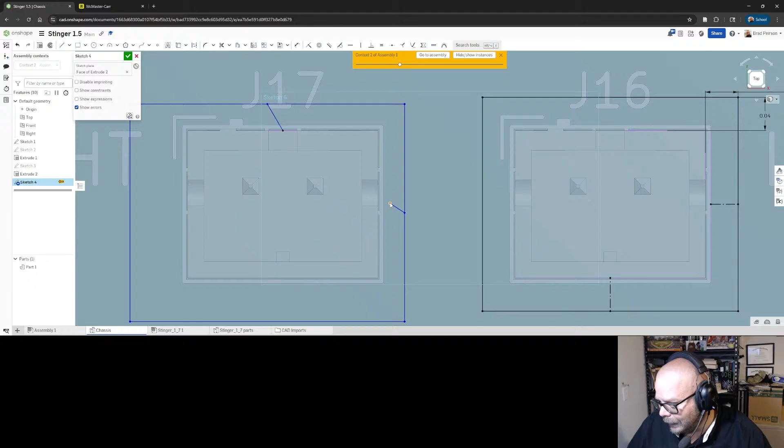So that's why I'm doing it not to the screen print, but to the plastic on that side, or on the top. And then on the side, I can go to the screen print because it's one continuous line. Grab it there, go there.

Horizontal. Oh, you deselected. That's another thing I've noticed I have to get used to coming from SolidWorks, things deselecting before I'm actually done with them. In SolidWorks I could do 3 or 4 things to that line before it deselected, and here it just deselects itself. So...

Dimensions, 40 thousandths. I think that's not it. We've got what, the whole Arduino? No, just the whole brain of the outfit, right?

What to do there? I think for the Arduino specifically, I'm going to get a little fancier with the rectangles. So before jumping into the Arduino, I'm going to leave that for last. I'm going to drop the angled rectangles that we need in these two. So first, before I try to send... well, I can't. Ooh, that's interesting, I can't.

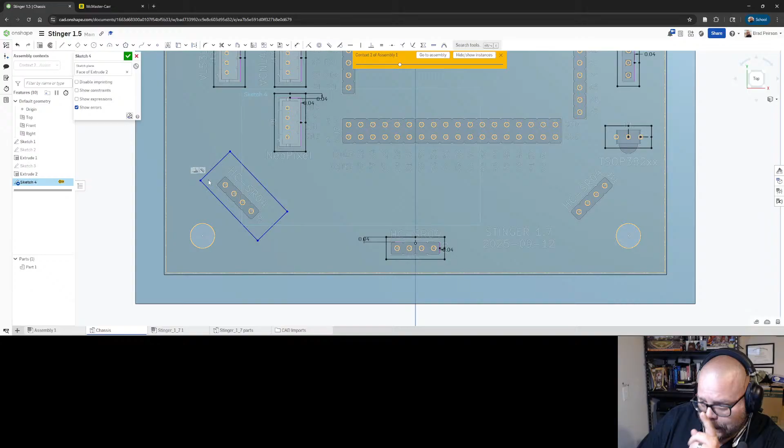Oh, I know what I can do. I was going to say I can't vertical these in order to center these rectangles, but what I can do is use a tricky combination of parallel and perpendicular constraints. So that's what I'm going to do.

Let's dimension first and make sure that's at 45 degrees. I'm getting lost, it's also getting late. That must be a sign. So 45 degrees, why? Because I designed the PCB, I know I put these at 45 degrees. Yeah, I mean, they just are.

So there's that. We're going to use the same basic technique. Grab that, I'm going to midpoint this, but again I can't just vertical it, obviously, because we're at an angle. So midpoint, but what I can do is make it parallel with that. Parallel. Now we're centered. And I can do the same thing on this.

Midpoint here, where are you? Light up, there we go. I do kind of like how SolidWorks, I mean this isn't bad, gives you earlier warning when you're getting close to the midpoint. Like this, in Onshape you've got to be right on it, man.

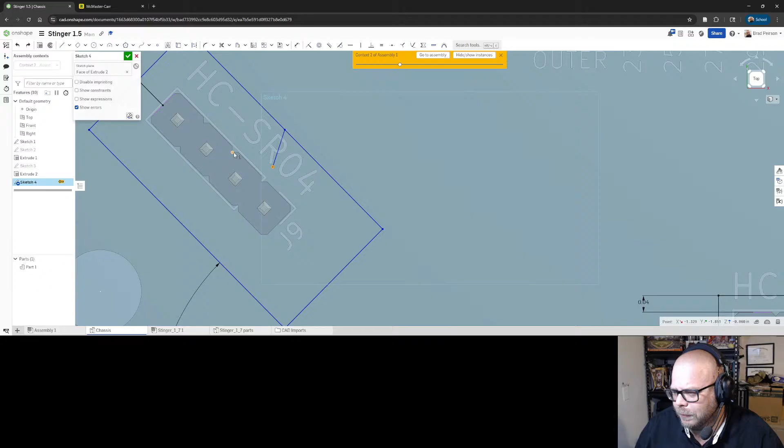Undo, I hit coincident, see? Forgetting what my icons look like. Oh, I don't want midpoint. Did I just select the wrong point? Is that all I did? Coincident, there we go. I must have selected this point or something.

Deselect and parallel. I can either parallel with the bottom here or perpendicular to one of these. I'm just going to parallel it. Why? I mean, no reason, just because I can. I used parallel on the other one, might as well use parallel on this one. I can, or should, anyway. I don't know that I've tried this yet.

Should be able to put the same 40 thousandths. And it should... red. Why don't we like red? What don't we like? Yeah, we're in context, I get that because... why don't we like a dimension there? Delete.

Parallel. Is it because this is defined? Let's get rid of that. I'm now curious why that's...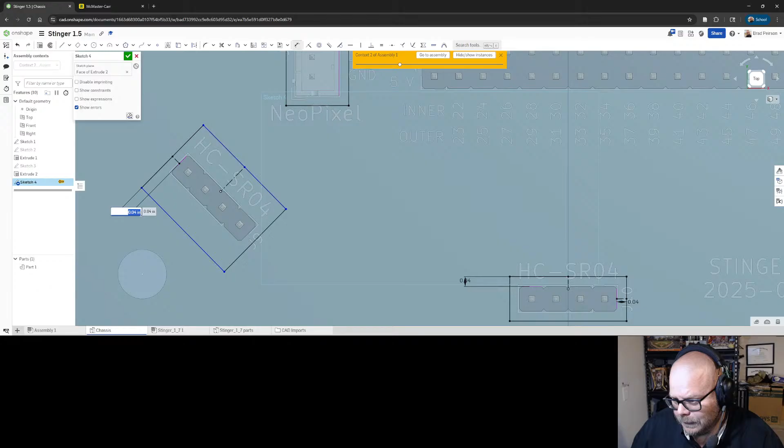Let's make this parallel instead of defining an angle and see if it will let me dimension it. I mean, what's weird is it let me dimension it and then it's still 40 thousandths, but it freaked out. Now, I'm not going to blame Onshape for that, because SolidWorks does the same thing sometimes, right? You're cruising along doing everything the same way you have, and then all of a sudden the whole thing goes kaboom, and you're wondering why.

And I mean, just because it felt like it, right? So yeah, parallel, I guess, instead of 45 degrees. It's definitely going to break if I throw an angle in here now, because that parallel will have it over constrained. But yeah, if I drop it in, it's 45 degrees anyway. So I don't know, I mean, it's in, it works. I'm not going to question it too hard.

Line here, midpoint me. Ooh, I almost dropped that in vertical. That would have been one of those interesting things to figure out why things broke later.

Did I construction those? Yes, that is construction. Make sure I don't forget any of those, little detail. No vertical, don't go vertical, vertical will break. Coincident there.

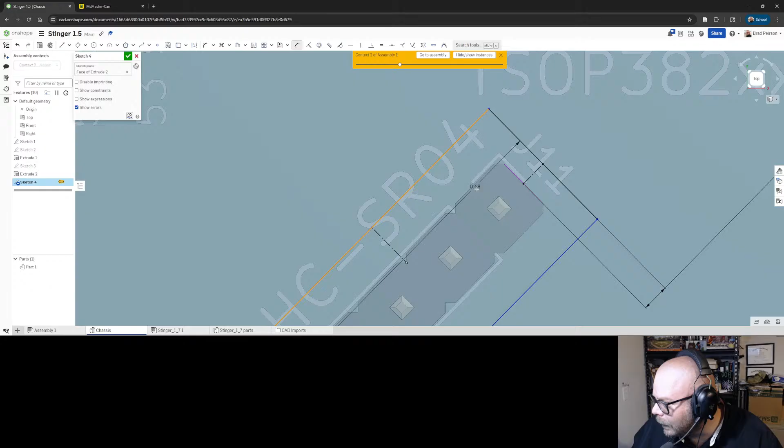Okay, you and you are parallel. You and you are parallel. Parallel, parallel, okay. And you are now parallel. Cool. Now watch it break. I've also had SolidWorks do this to me before, where you'll do something the same way twice, and the second one will break, and you'll have to go back the original way. So that would be absolutely hilarious if this inherited it as well.

So there we go. And I think, all right, that's everybody outside of the Arduino, right? Kind of looks like it. I'm just going to double check quick and make sure that all of those little centered lines are all construction, so I don't run into any headaches later. We're good, we're good, we're good, we're good, and we're good.

Okay, now for this guy, I think I'm just going to get a little fancier, not much, and just make a continuous sort of U-shaped cutout for this guy. Because of all the stuff that plugs in here, I want the Arduino to have the most support. I don't want to just cut a big rectangle and leave this whole middle unsupported, because this thing has got so many pins, it is so hard to seat on all of those pins. You've got to push pretty hard.

And just the nature of, again, I mentioned it like an hour ago, tolerance stack up is a thing, and if every pin is off by just a little bit, it doesn't take much to make things harder to push together. So I want backup here to definitely make sure when we seat the Arduino, we're not just pushing against the board.

So I'm going to go ahead and do this with lines and just draw a U-shape around this whole mess, and I'll go in and lock it down with the 40 thousandths dimensions and center some things here in a minute, but first the U-shape.

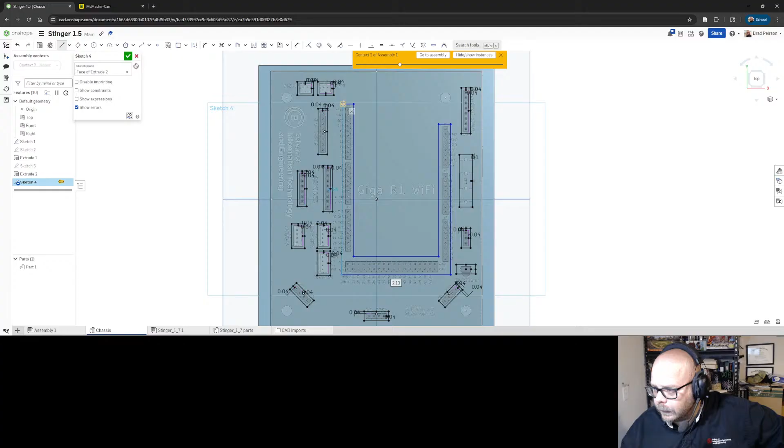This corner isn't going to be too terrible, so I'll let that go all the way down here. Come over here and shoot back up, and that's probably not vertical. So first thing I want to do is make sure that that is vertical. There we go. I still don't understand why.

I'm not used to, I mean, SolidWorks will move things. But on that very first thing you do, whether that's a dimension, whether it's a vertical like I just did, whether it's any of that kind of stuff, the first thing you do to lock down a sketch entity doesn't move that much stuff. I don't understand why this does. It is a little annoying. It is a little frustrating.

At the same time, it is what it is, right? At a certain point, you can't keep complaining. And it's YouTube, right? I'm going to keep complaining. It's sort of the nature of YouTube. But again, I bet everything moved, right? It looks like everything shifted when that thing shifted over, which I don't get it. I don't think all of that stuff should move. Like the things that are connected to this top line that I'm working with, sure. Like these two vertical lines, absolutely. There's no reason that I can see that this stuff over here should move.

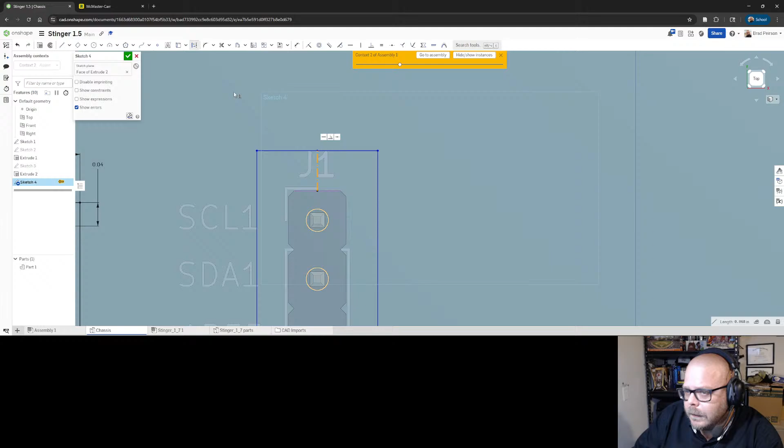It shouldn't, but it does. And we can either complain or realize that I chose to use this, and we take the good with the bad. So far, realistically, honestly, I've only got a couple hours experience with Onshape, and honestly I'm pleasantly surprised. Maybe that's even a little more derogatory than it should be. There's nothing major I can complain about. Everything I would complain about is relatively minor. At the end of the day, I'm on an educational account here.

I did that because I wanted to play. They've got some options for setting up assignments and stuff, and I wanted to play with some of that. But realistically, it's free, right? It's free, full functional CAD. So far, it's been able to do everything I've thrown at it that I would expect SolidWorks to do.

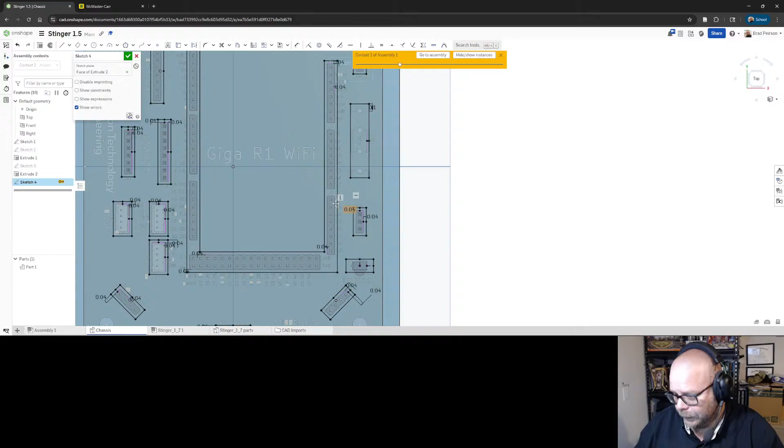It did back in the little first look video that I did. I mentioned and actually showed in the video that I was getting some slowdowns. And I do need to apologize to the Onshape people because it turns out that the slowdowns were my fault. I use Overleaf a lot for writing, and hardware acceleration was giving me issues. Browser hardware acceleration was causing my Overleaf cursor to just plain disappear on me.

That's centered. Oh, because I defined it down here. I don't need a center because I defined the dimension on both sides. But hardware acceleration was causing my cursor in Overleaf to disappear, which, when you're in a text editor, is kind of important to know where your cursor's at.

So it turns out that when I did that Onshape video, I still had hardware acceleration turned off, and that was all of my slowdown. I haven't seen, I mean, I'm on my desktop at home right now. On my work laptop it slows down a little, but that laptop just has integrated graphics. This desktop is not super high-end, but it definitely has better than Intel integrated graphics. And I haven't noticed any lag at all since I remembered that I had hardware acceleration and turned it back on.

So we now have everybody outlined. Yes, looks like it. I did double check that everything was construction. I can accept the sketch now. All of that for one sketch. Isn't that fun? All right, and we do have a lot of it in context because I dimensioned to various things, right? See how the pink shows you what the context is, that's kind of cool.

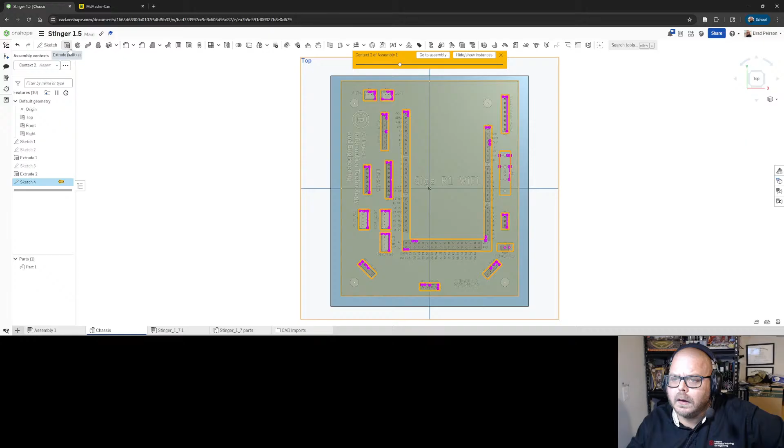Let's extrude and remove. Now it wants to punch all the way through. We don't want that. I wrote it down. And like I said at the beginning, this is literally just scratches for memory. I'll switch back to big. There we go, little shadow. You would not ever be able to take my notes while I'm doing this and recreate anything. When I'm done with these design sessions, whatever piece of paper I was working on is literally thrown away because the notes are meaningless once you get there, mostly meaningless to me right now.

I'm thinking the 100 thou on here was how deep I needed to make this, I hope. So let's try it. 100 thou, are we within? Yep, we're within the plastic. Sure, why not?

Okay, I'm going to accept that. I'm going to close this. All right, that gets rid of the PCB, and I'm going to go to my main assembly.

I want to change transparency here for a minute. Now, one thing I haven't figured out yet - I played with transparency a little bit - is how to make it stick. Like in SolidWorks, if I want to make this transparent, I do that, and it'll stay that way until I tell it not to be. Here, doing it this way, maybe I did it wrong, but as soon as I close this, it goes back to opaque.

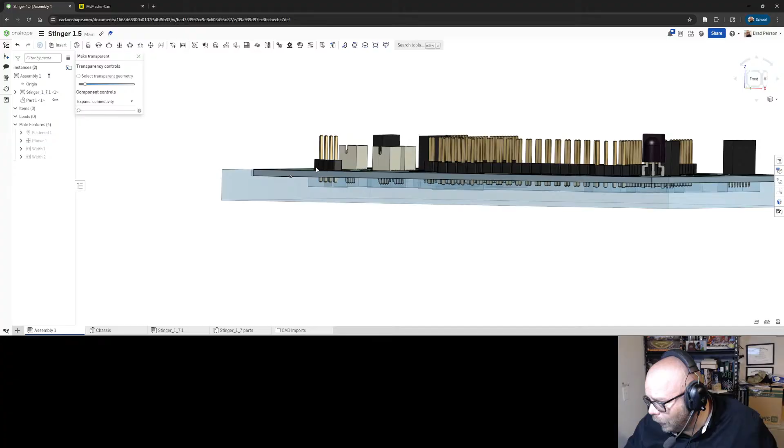But if I make it transparent and just eyeball it, we should have plenty of clearance everywhere, and it looks like we do. And honestly, it looks like we can make this piece of plastic even thinner. Do we want to do that?

Do we want to do that? How much material do we have? I'm kind of in the head zone where I want this thing in the end. I mean, I expect it to look funky.

I'm not going to get to it tonight. In fact, I plan on wrapping up somewhere in the next 5 or 10 minutes. So I'm not going to get there tonight. But in my head, I anticipate this thing when it's done looking really funky. Like, if you gave it to a guy with a CNC mill, he would look at it and kick you out of the place. Kind of funky.

That said, for now, where's my parallel? 140. Wasn't I shooting for 100 or an eighth? 140, 15 thousandths off of that gets us to an eighth of an inch.

I'm going to leave that alone, because at the end of the day this thing is going to be 3D printed. Now, one thing I don't know is because I don't know what the full thing looks like yet, so I don't know which direction it's going to be 3D printed.

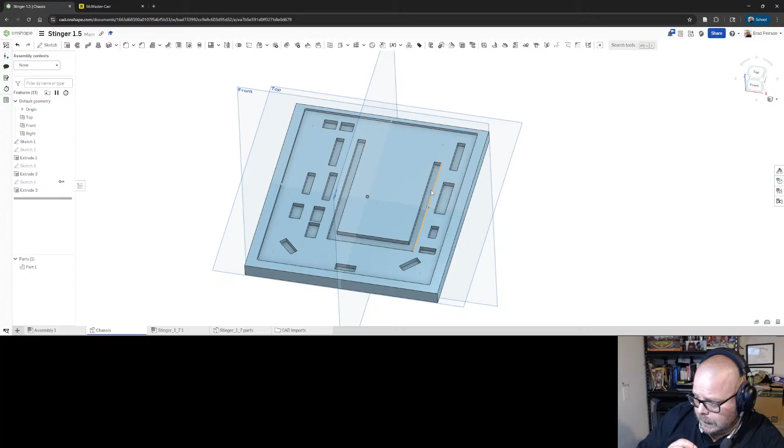So if I assume, and I don't know that this is correct, but if I assume this is the print bed - 140 thousandths at 20 - that is really thick, at a 0.2 millimeter layer height. Is that right?

0.2 millimeter. I know I have to remember how that printer runs. Is that right? 0.2, I think, is the coarse setting - the speed setting. You get thinner for higher quality settings. Does that sound right? I think that sounds right.

Because I remember - is it 15 thousandths that we used to set? I'm trying to remember, I have settings. I don't think I have any of the parts on this computer. I have settings that are designed specifically to print 0.2 millimeters.

Yeah, that's what I'm thinking. But I have prints that are specifically designed to print just enough layers to not infill, which is 3 layers, and I want to say that was 45 thousandths of an inch, which is, again, back to the calculator, because I never convert metric in my head.

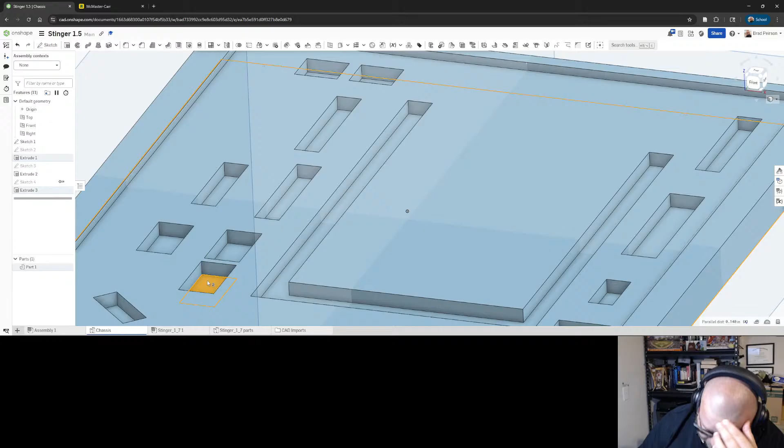I don't know, but what I'm thinking is, if this is the bottom, do I really need infill or enough material to infill down here? It could just be - my default is 3 layers, right? That much I remember, I set that at the lab, I set it here at home. 3 layers before it starts to infill, and that should be the 0.2 millimeters. 30 thousandths?

It's roughly 8 thousandths times 3. 30 thousandths of an inch is what I usually use as the guideline. It's really 24, but 30 thou, the slicer usually fudges that correctly. So I think 30 thou is what I usually use.

The question I'm struggling with right now, since the whole purpose of this is to talk through this stuff, is do I want the bottom of this that thin? What is the bottom of that actually doing? The bottom of that is doing nothing.

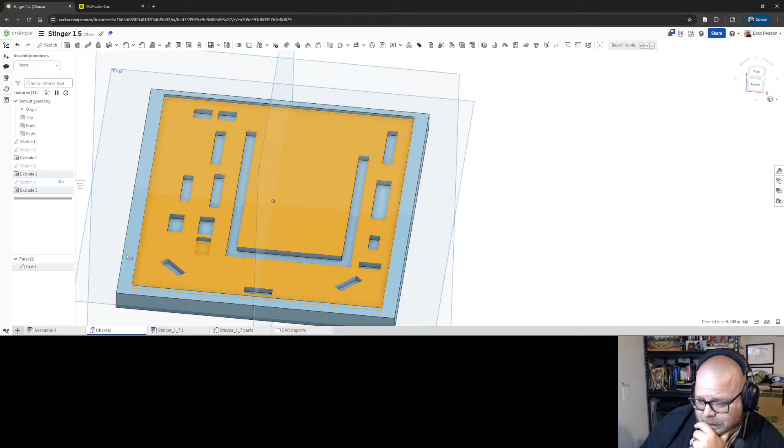Except for this, the bottom of this big Arduino U shape is kind of important, because if you go pushing on this without any bottom there, it's going to just pull right out. But the rest of it, these could really be through for all I care. This thing could be way shorter, as long as I've got enough plastic to make sure I'm not dragging those pins on stuff.

And the bottom then is only really there for aesthetics, so that if you look at the bottom you won't be able to see anything. It'll be clean. Let's do it. Let's make that 30 thou. What was it now? It was 140?

So to get to 30 thou from here, the parallel distance down at the bottom right there is 140. If I want 30, all I need to do is take 110 off of the total extrusion, which is this feature. So if I edit that feature, I want to take 110 off that, and just for sanity I'm going to do it in the calculator.

Got my 30 thou. Like I said, if I slice it... So the lab printers are Anycubic, and as far as I know they require Anycubic slicer. Here I've got Cura because this is an Ender, and the settings are definitely different. I did set the layer heights to be the same, but I'm going to leave it here for now.

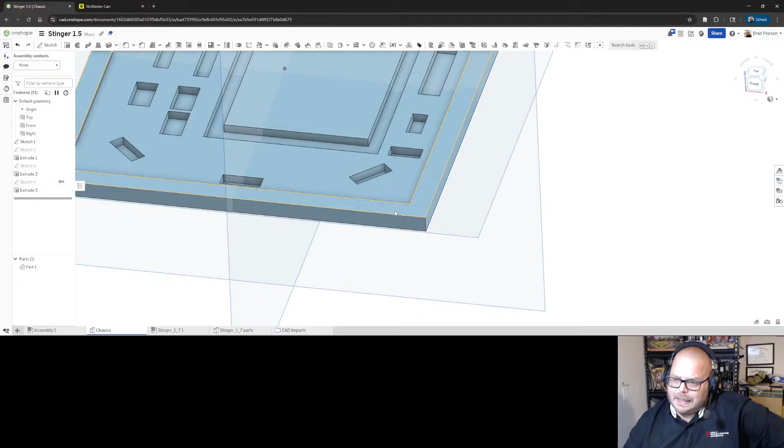Maybe I'll export it later, or take it to the school and see what those settings are, or see how the slicer interprets it. But again, I could be arguing about nothing, because it could end up being printed on this face or something. So I'll leave it there for now. That's not a big deal. If we need to add material, we need to add material.

I think I'm going to end the stream here. That was less progress than I kind of expected, but like I said, hopefully that was useful to somebody. The idea was to sort of talk through some of the thought process.

When we get to some of the more in-depth stuff next time, we'll do this again, same time next week, and we'll get to the motor mounts and the battery case and stuff like that. I think the idea that I have for this will become more clear. Now whether it'll work or not, that's an entirely different question. But at least as far as viewers are concerned, the idea I have in my head for what this could look like will become clear.

The difference between starting like the original version of this that I tried last week, not on stream — the original version looked a lot like this, and it basically started as a big block that I started to carve stuff out of. In this one, what I want to try is to start with basically nothing and add to it, sort of coming at the design from backwards.